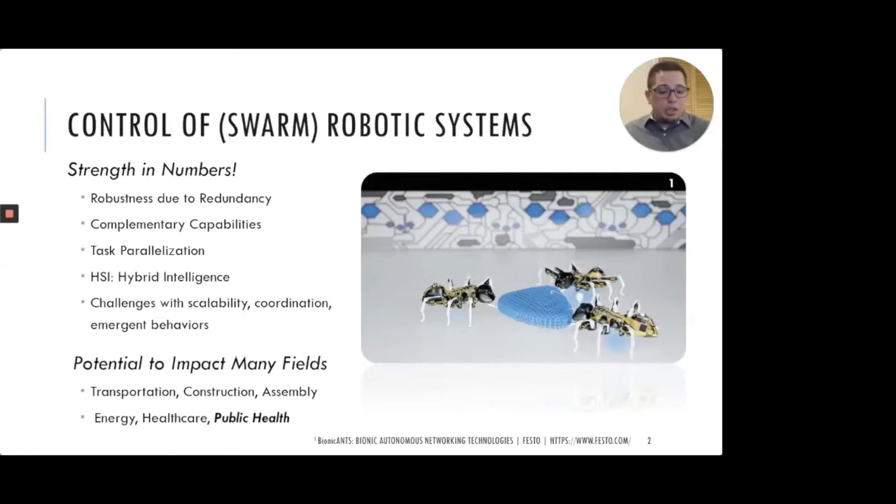In this particular work that I'm going to be presenting today, we're addressing the question of how do you manipulate a swarm of robots. We try not to control individual robots with this work. Instead, we set an objective for the collective of robots, and the individual robots then coordinate their motion with one another in order to achieve this collective objective.

In this work, we're going to take a slightly different approach where we think about the boundary itself as the thing that we get to control, kind of like taking the sand and rolling it up into a ball, and actually being able to take this ball and move it around.

This is going to allow us to control the overall position and scale of the swarm. We're going to be using coverage control in order to do this, as it provides a scalable mechanism to influence the swarm of robots with these abstractions for the density and concentration of the robots and the boundary, or the position and scale of it.

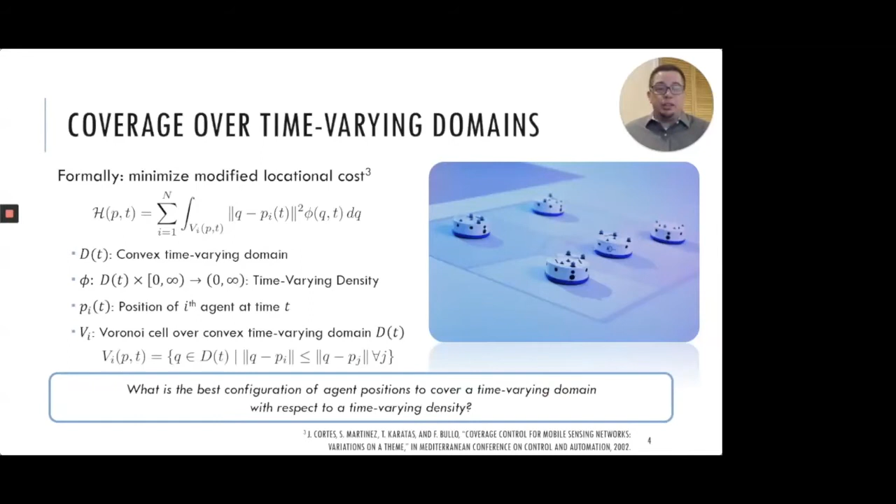Now, this locational cost is non-convex even in fairly straightforward situations where you have, for example, uniform density and a polygonal domain with few rules. And so when we try to minimize these configurations, we really think about achieving local minima or near optimal solutions.

It is a well-known result that for minimizing these configurations with respect to the position of the robots, a necessary condition for optimality is that the robots form this centroidal Voronoi tessellation configuration. So what does that mean? It means every single robot's position pi coincides with the center of mass for their respective Voronoi cells.

The center of mass is provided by the expression that we see here on the slides. It's the rational expression of two area integrals, whose domain of integration is actually the Voronoi cell, state-dependent and time-dependent because of the time-varying domain. And the integrand is time-dependent through the density function.

And so if we want the robots to occupy this center of mass position, that means that we're asking the robots to track this time-varying and state-dependent reference. And we want to control that it is able to achieve this.

Now, intuitively, from a controls theoretic standpoint, if we're just tracking our time-varying reference, then we need a few building blocks into our controller. First one is tracking feedback. This is pretty standard. Second one is tracking feed-forward. This is going to account for the time variations that we have from the domain and the density, and are going to allow us to then maintain this centroidal Voronoi tessellation once we achieve it.

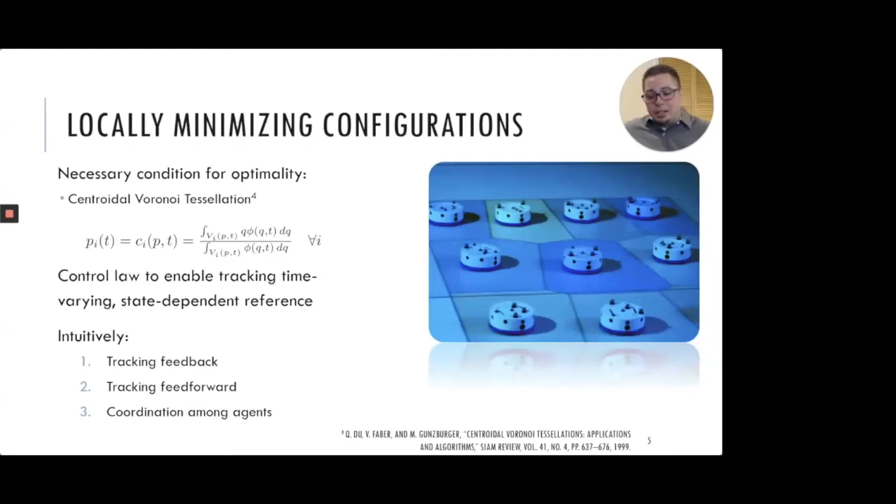Coordination among the agents is going to allow us to take into account the state dependency and the Voronoi tessellation that affects the domain of integration in order to, again, maintain this time-varying domain and density's centroidal Voronoi tessellation.

The coverage control law that we propose is given by the following expression. And it looks similar to expressions that we have proposed in the past, but there are nuances that are hidden here within the different partial derivatives that are unique to the problem that we're addressing here with the time variables.

But we can see that all the building blocks that we required in order to achieve and maintain these centroidal Voronoi tessellations are present. We have a standard tracking feedback term that actually looks a lot like the standard Lloyd's algorithm that's very well used in coverage control problems.

We have a feed-forward term, the partial of the centroids with respect to time, that accounts for the time evolution of these domains and the densities. And we have a matrix that accounts for state dependency here and provides coordination among the different agents.

In previous work, we've shown that this matrix can actually be swapped out with truncated versions of the Neumann series expansion in order to set the desired level of coordination among the agents and decentralize this controller.

For example, taking only the two terms in the Neumann series expansion would only require coordination between the nearest neighbors in the domain.

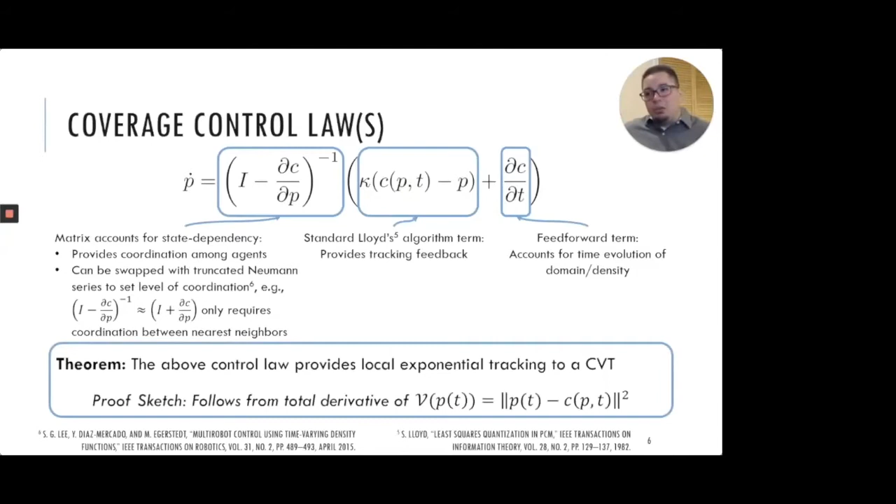And so in the paper, we show that the control law with the updated feed-forward terms and expressions are still able to provide local exponential tracking of the centroidal Voronoi tessellation.

To account for time-varying domains, we have the following proposition in the paper. It says that if we know the normal velocity of almost every point in the boundary of the time-varying domain, then the feed-forward term is given by the following expression.

Now, the expression itself is not so important. What is important here is that this first term accounts for the time variations from the density. The second term accounts for the time variations of the boundary of the domain.

And because the domain of integration for that integral on the second term calls for the intersection of the Voronoi cell with the boundary, what this says is that only the agents that are explicitly sharing a boundary in the Voronoi cells with the boundary of the domain are explicitly influenced by the domain itself being time-varying.

The agents on the interior are not explicitly affected by the time variations. They're implicitly affected through the coordination between the different agents. And this result follows from application of the Leibniz-Reynolds transport theorem and a lot of algebraic manipulation.

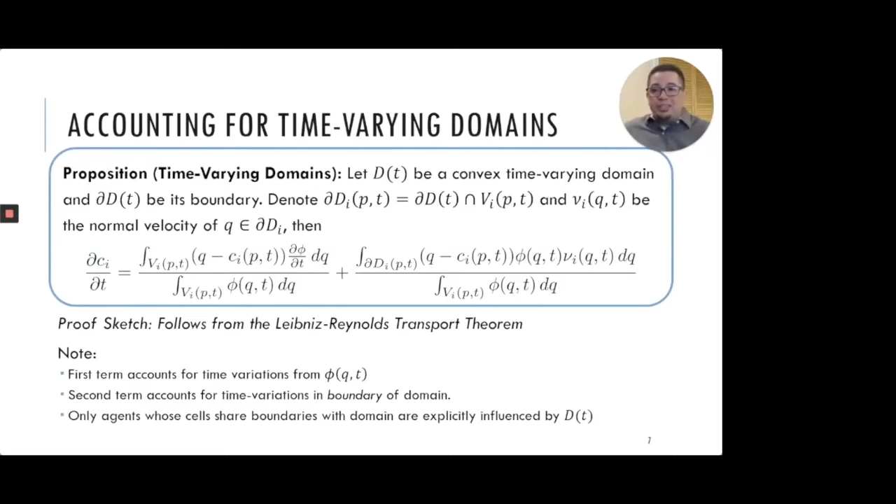So the scalability of this coverage control scheme was addressed in the paper as well. What we find is that under uniform density and 2D convex polygonal domains, the algorithmic complexity for our approach is actually constant in time.

Here we see a simulation with 100 robots where the square domain is actually traversing a circular path. What we see is that the agents end up forming this hexagonal configuration, and this is the heart of why this algorithm can actually be enacted in constant time.

In the paper, we show that we can find closed form analytical expressions in the case of uniform density for every single term in the control law. These closed form expressions are a function of the position of the neighboring agents in the swarm. In order to find these neighboring agents, we need to construct a partial Voronoi diagram.

There exist methods that allow us to compute these on average with a time complexity that depends on the number of neighbors.

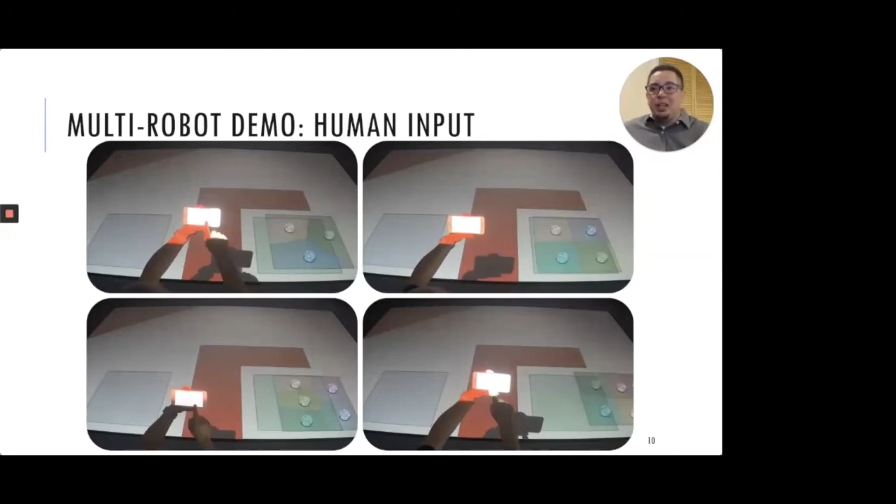This brings up an interesting feature: because the robots are always occupying the interior of the domain, it automatically provides a level of guaranteed safety for the robots, so they are not going to go into unsafe areas because the domain itself is not allowed to go there.

To conclude, we presented a scalable algorithm for manipulating a large team of robots via coverage control over time-varying domains, with exponential tracking results to locally optimal configurations. We've shown that under uniform density, there are closed form expressions, leading to a constant time implementation even for large teams of robots. The punchline is that a time-varying domain and time-varying density can serve as exogenous inputs to manipulate the swarm into executing motion plans or incorporating human inputs.

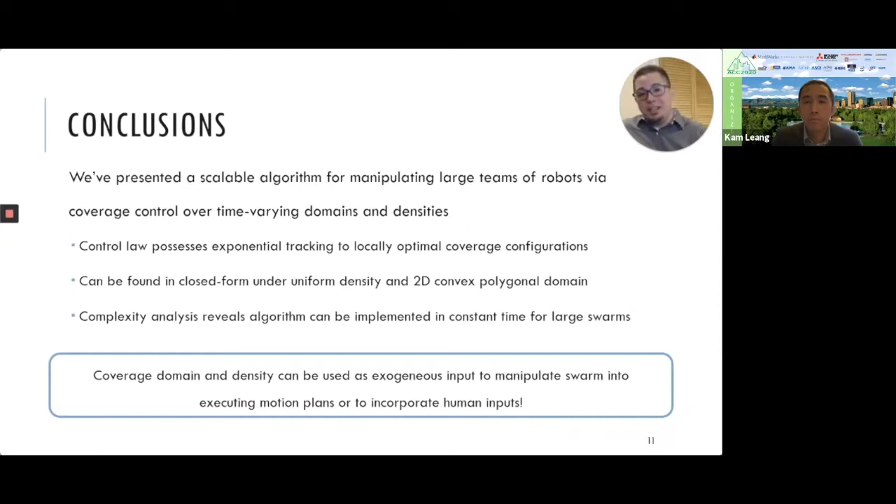So thank you so much for watching.

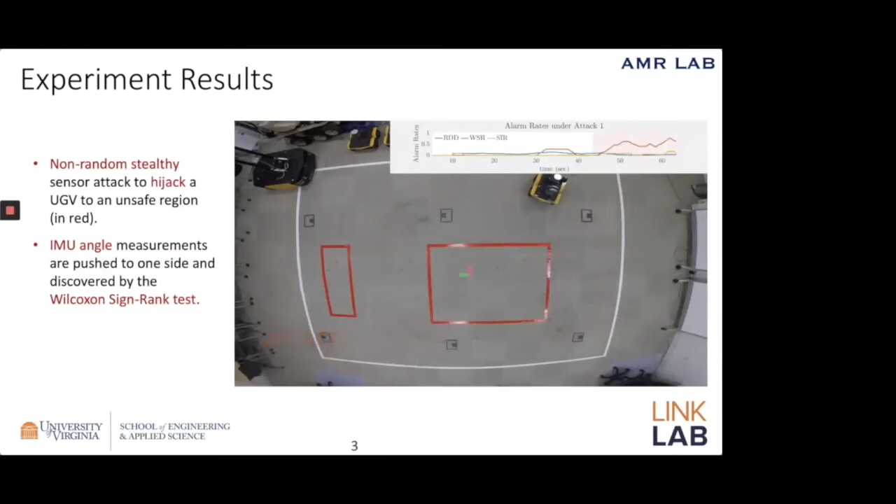However, as you can note on the top graph, the Wilcoxon test in this case is able to detect non-random residual behavior, resulting in an increased alarm rate. To hear more about this work, please visit our poster. Thanks.

Hello everyone, and welcome to my presentation. My name is Harshat Kumar, and in this video I will be talking about the navigation of quadratic potentials with star obstacles. Path planning involves 2 components: reaching a specified target goal from a start configuration and remaining in the free space, or avoiding obstacles along the way.

Because this is a fundamental problem in robotics and control, there exist many approaches to solve this problem, each with their own inherent advantages and disadvantages. Our approach is informed by the artificial potential approach. Artificial potentials combine an attractive potential to the target with repulsive potentials from the obstacles. The agent follows the gradient field generated by this artificial potential to reach the target.

This approach is popular as it can be implemented without global information and with smooth trajectories which are favored for bounded torque actuated robots. Unfortunately, artificial potentials are known to be incomplete, as the agent might converge to a local minimum of the potential rather than its goal.

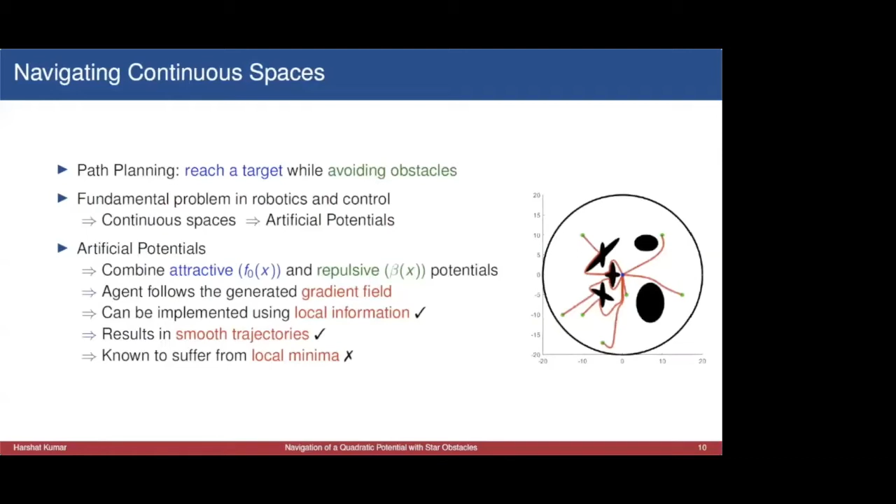Subject to certain geometric conditions, the Rimon-Koditschek potential can be proven to have exactly one local minimum at the agent's target. Spherical obstacles satisfy these conditions, but they lead to over-conservative obstacle estimates. When the obstacle is estimated by wider shapes, such as ellipsoids, a local minimum forms adjacent to the obstacle.

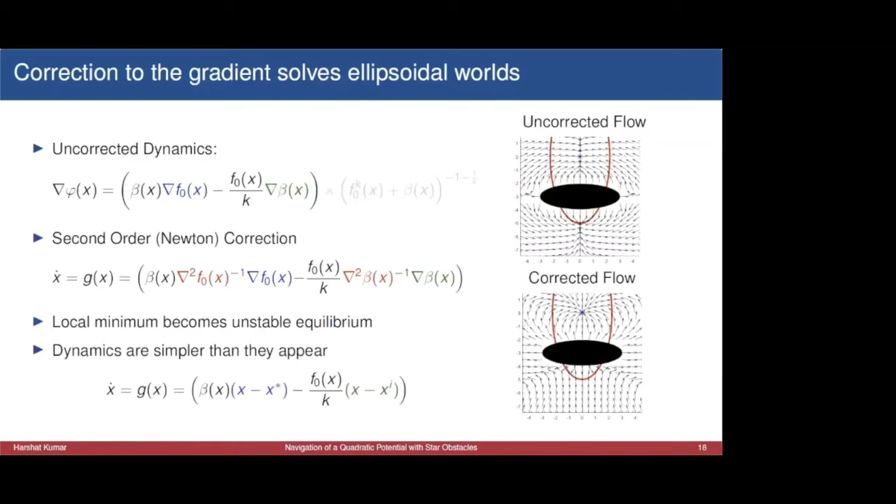In previous work, we showed that a correction to the dynamics enables the agent to circumvent wide ellipsoidal obstacles. Pre-multiplying by the inverse Hessian converts the wide ellipsoid into a sphere, and the local minimum is converted into an unstable equilibrium, as shown here on the bottom right. In fact, due to the quadratic form of ellipsoidal obstacles, the proposed dynamics are simpler than they appear. A closer inspection of these simple dynamics allows us to extend these convergence results beyond ellipsoidal obstacles.

Notice that x minus x star denotes the direction from the agent to the center of the quadratic potential. Similarly, x minus xi denotes the direction to the center of the obstacle.

As such, we propose the same simple dynamics can be applied to a more general class of obstacles called star obstacles. Star obstacles are defined by a center point such that the line segment between the center point and any other point is contained in the obstacle. In fact, all convex obstacles are star obstacles, with any point being a center point.

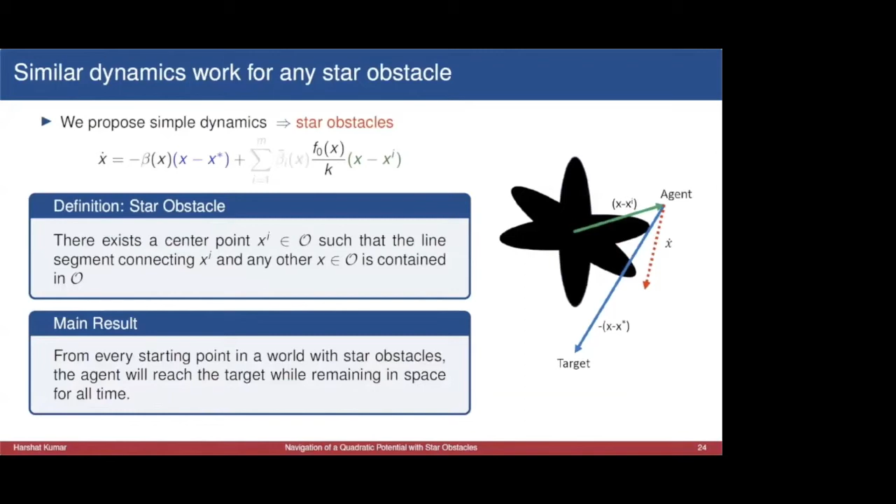In this work, we prove that from any starting configuration, the agent will reach the goal without colliding with the star obstacles. Thank you for attending my presentation, and I look forward to speaking to you in detail during the interactive session.

The title of the paper says I will quickly present a model-based cascaded control concept, so as well the control concept, in very brief form in this short presentation.

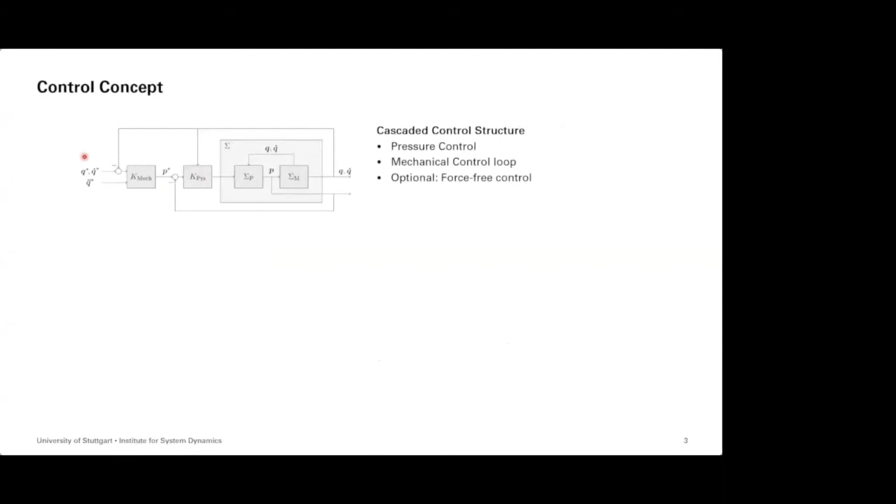Regarding the control concept, we used a cascaded control concept with an inner pressure control loop and an outer mechanical control loop. Optionally, a force-free control was also implemented, which you can find in the paper.

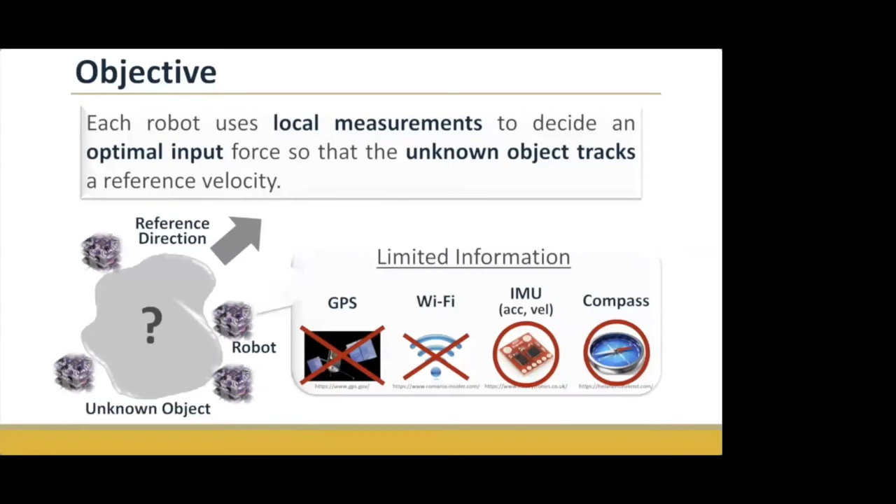We consider a payload manipulation problem where a rigid object is grasped at n+1 points by n robots and one external actor, for example, a human participant. They cooperatively transport the object. The input matrix of the robot, influence of external force, and centrifugal and Coriolis terms are unknown.

This paper presents a novel distributed optimization algorithm based on primal-dual gradient dynamics. In general, we need to know the B matrix to apply the primal-dual gradient dynamics for this type of optimization problem.

However, the cooperative payload manipulation system has a suitable relationship between global and local velocities. By virtue of this suitable property, we can obtain fully distributed optimization dynamics with an additional mild assumption of difference in angular velocity. Our manipulation scheme amounts to implementing a combination of low-pass filter and PID velocity controller.

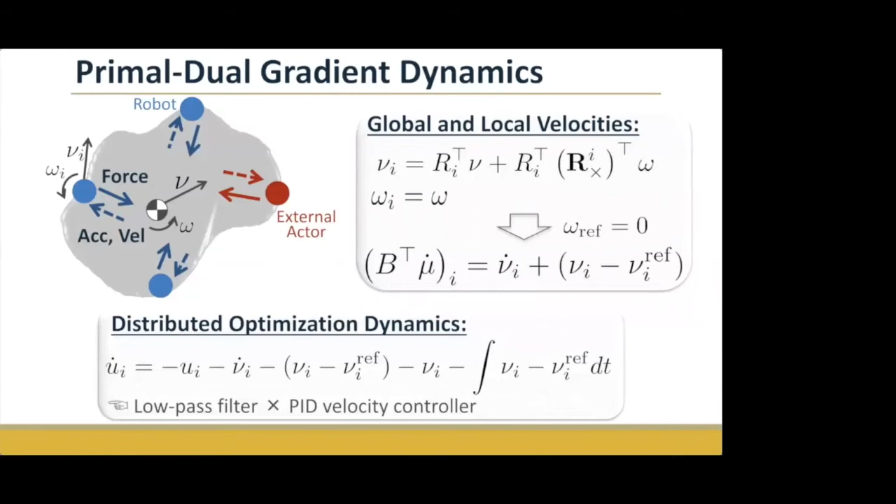As a main result, local exponential convergence of the presented dynamics can be proved. Finally, we demonstrated the effectiveness of our presented approach through numerical simulation. We can confirm that the object velocity converges to the reference, even after the decrease of the number of active robots.

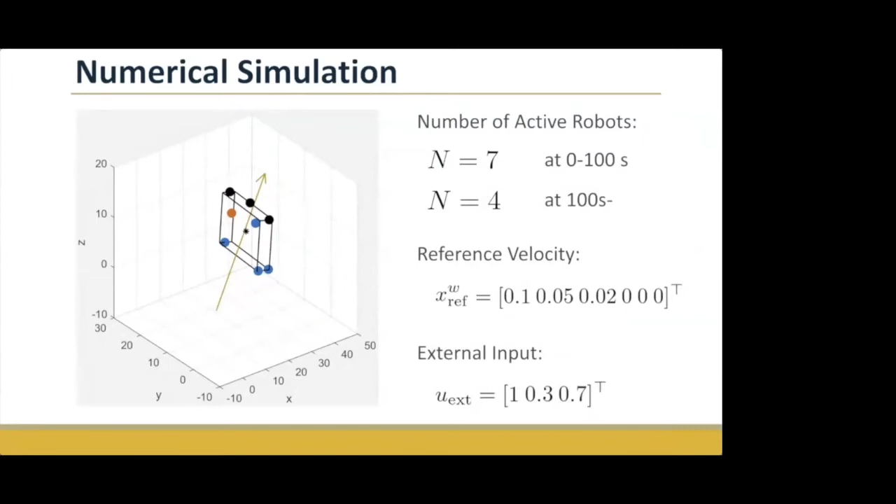A striking example of collective transport is what is done by ants, because they do not exchange information, they have no global position information, they have no knowledge about the payload and their teammates, they are not given predefined trajectories, they have knowledge only about the direction to the goal, and they rely only on their local information.

So we define a problem in the framework where we assume that we have differential robots with one manipulator arm. The robots have arbitrary configuration and distribution on the payload. They have no information about the payload's dynamics, geometry, position, and velocity. They have no knowledge about the distribution and configuration of other robots, no knowledge about the attachment vectors, and no explicit communication capabilities.

The objective is that we want the robots to transport the payload towards the goal with a desired constant velocity, and we want the robots to converge to a stable steady-state configuration during the transport.

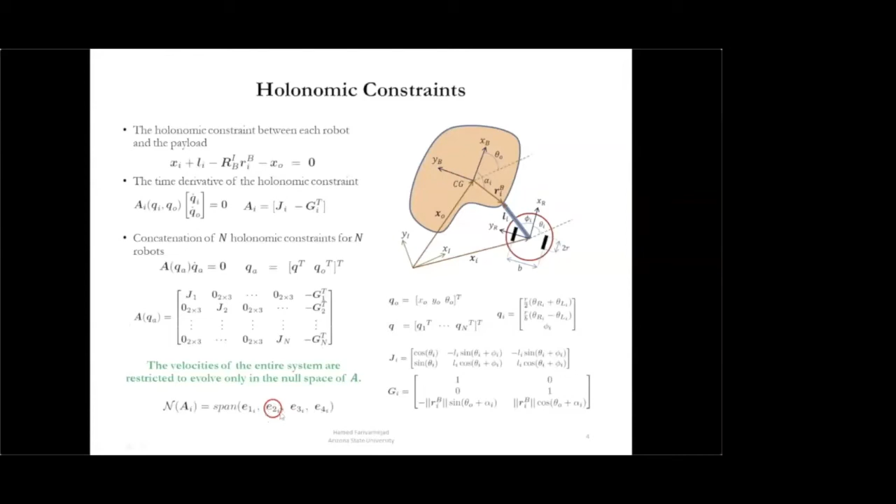If we integrate all these constraints for all the robots, we'll get this large equation with this large constraint matrix, the A matrix, and we know that the velocities of the entire system are restricted to evolve only in the null space of this A matrix, which is spanned by these four unit vectors, and among all these, E2 has a circle, because when we want to design the desired velocity for each robot, we use just E2.

to design this desired velocity. And when we design the desired manifold of motion with this equation, we can prove that with these desired manifolds, all the control objectives are entirely satisfied.

And with this linear parameterization of the robots, we can design this totally decentralized control law and adaptive law, and we can prove that the closed loop system is globally stable, and all the manifold parameter errors converge to 0 with this control law.

And we did a simulation in WEBOTS with 8 robots, and we can see that the payload here is transported to the goal with a desired, constant direction, without significant rotation.

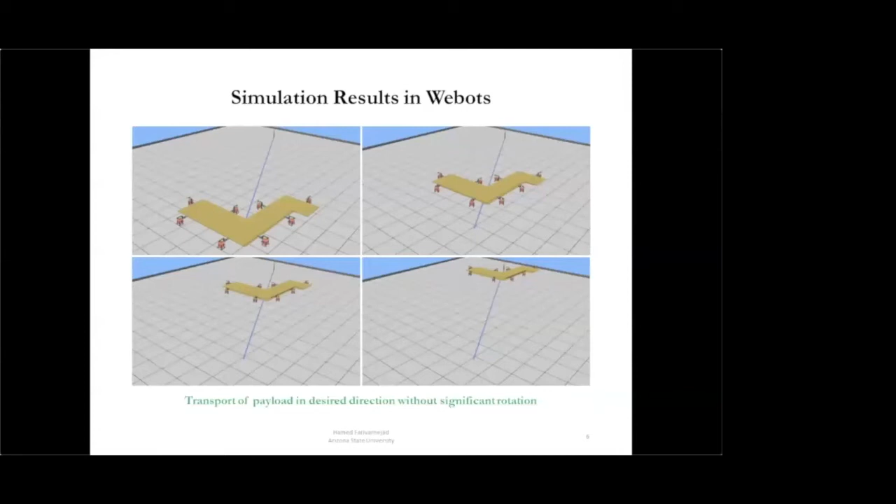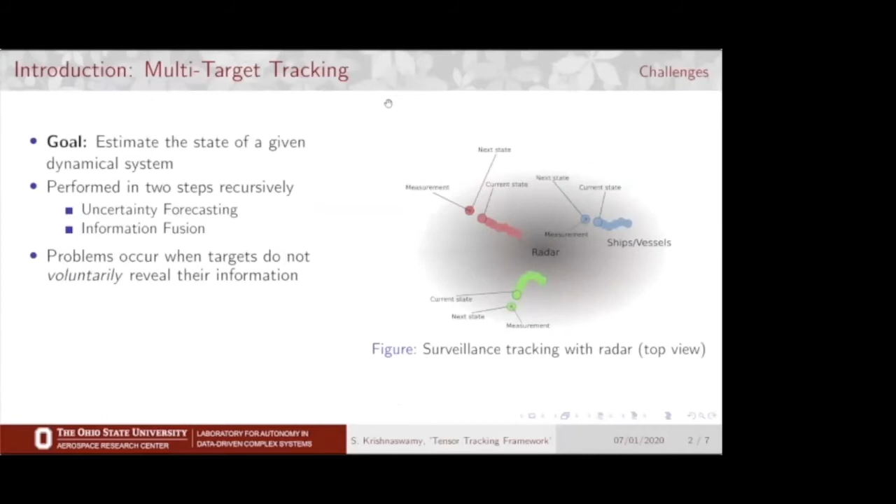Backing up a little bit, multi-target tracking aims to estimate the state of a given dynamical system. This is usually performed in 2 steps recursively: uncertainty forecasting and information fusion. The problem with the latter step is that targets often do not voluntarily reveal information regarding their state, and we need this information to determine which measurement to use for which target to perform a state update. This is complicated by the presence of clutter and compounded by the scale of the problem. This is generally known as the data association problem, and many solutions exist for it. I'm going to focus on one here.

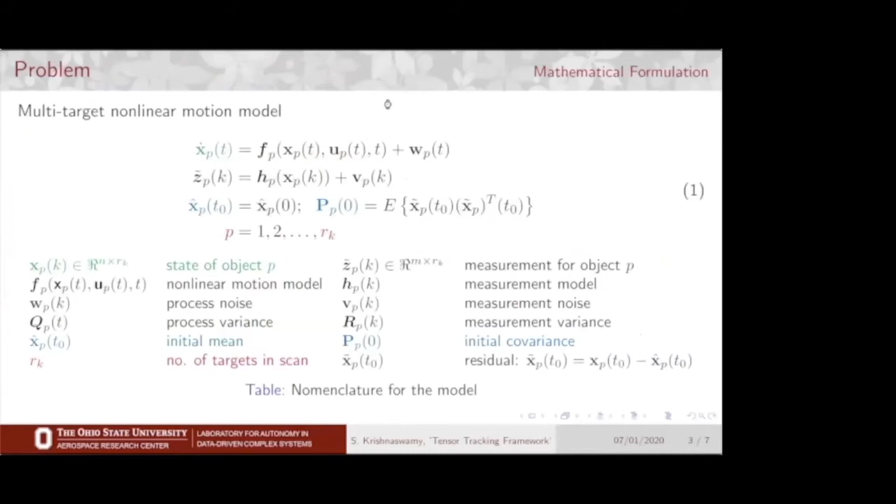To formalize this a little bit, this is the multi-target nonlinear motion model we're using in this paper. I want to draw your attention to 3 things: first, the number of targets, which is more than 1; the state of the object given by a nonlinear process model; and finally, Z tilde of P, which is the measurement needed to compute the state. But what we get in a practical scenario is Zj of K, and we need to reconcile these two somehow, and data association is how we do it.

The way data association is performed in this particular paper is by using DJPDA, which is a tensor framework developed and published earlier. I'm not going to go deep into this, but I just wanted to mention it.

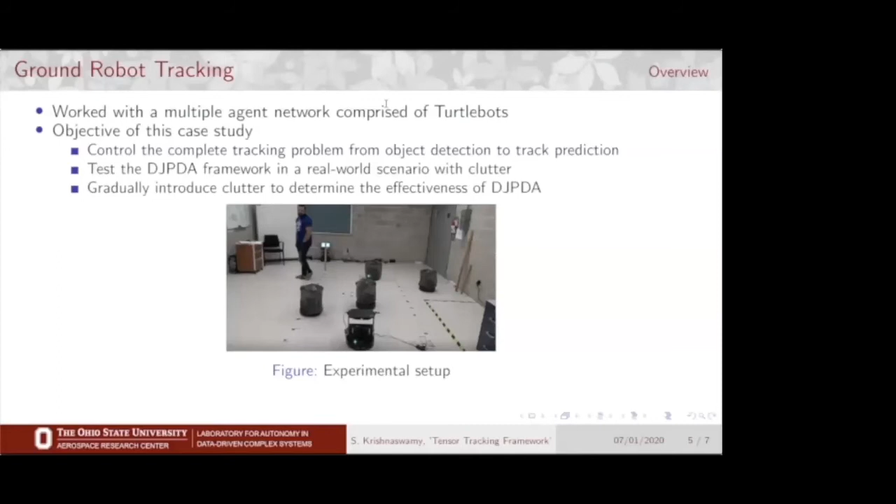The experimental design here uses a fleet of turtlebots. The objective of this case study was to control the complete tracking problem and test that DJPDA framework, already published, to see how it fares in a real-world scenario with clutter and higher data frequency. The experiments were conducted gradually, starting with 1 agent. Complexity was added by adding additional agents with the same process model, adding an undesired object with a different process model, clutter with an unknown trajectory, and random interference using humans.

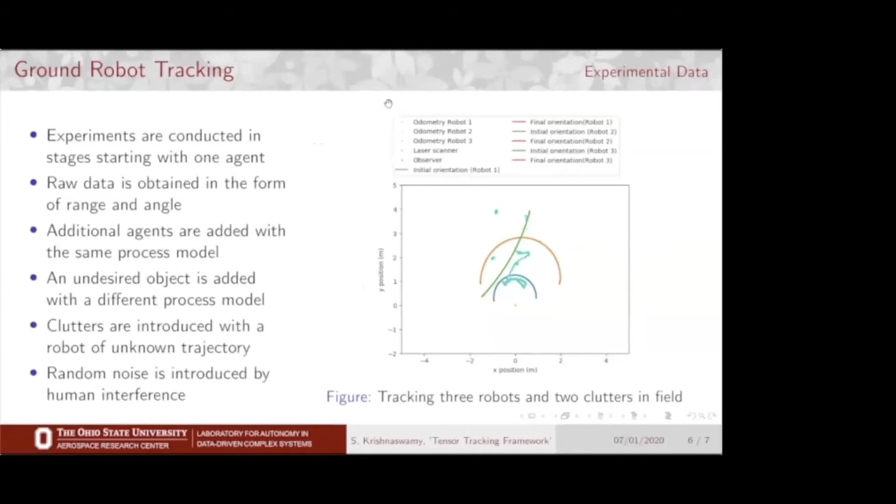We also did some simple data cleaning for this. We eliminated the wall noise because we knew the wall was at a known position. We also took into account the point clouds and performed a k-means clustering algorithm to determine what position each point cloud represents, which would be a turtlebot position.

I want to draw your attention to a couple of results here. First, this is the trajectory as computed after the turtlebot measurements were received, using the data association algorithm. The two main results here are ranks versus the log time, and the uncertainty.

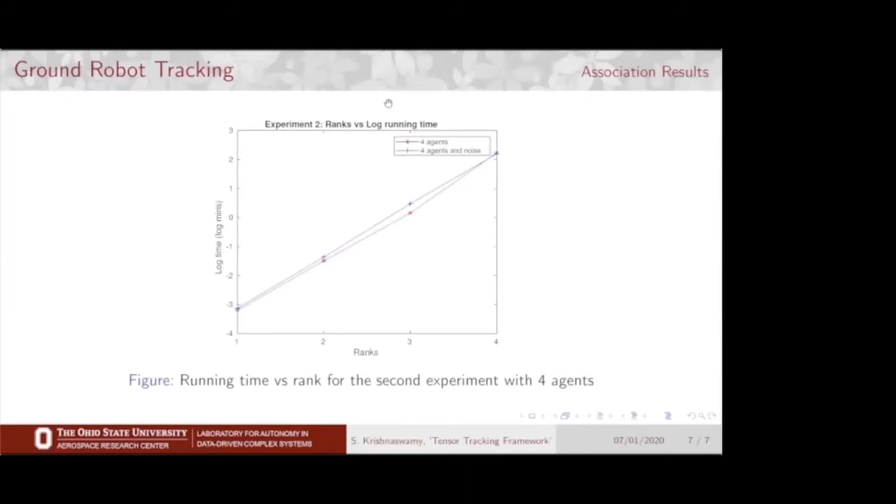Ranks are the tuning parameter that the tensor framework introduces. The higher the rank, the higher the complexity of the underlying algorithm. JPDA is known to be exponential. The key thing here is that ranks curb that exponentiality by introducing a tuning parameter. Once a rank is set, that time is also set, and the uncertainty reduces with the number of ranks. Together this gives us an additional tuning parameter.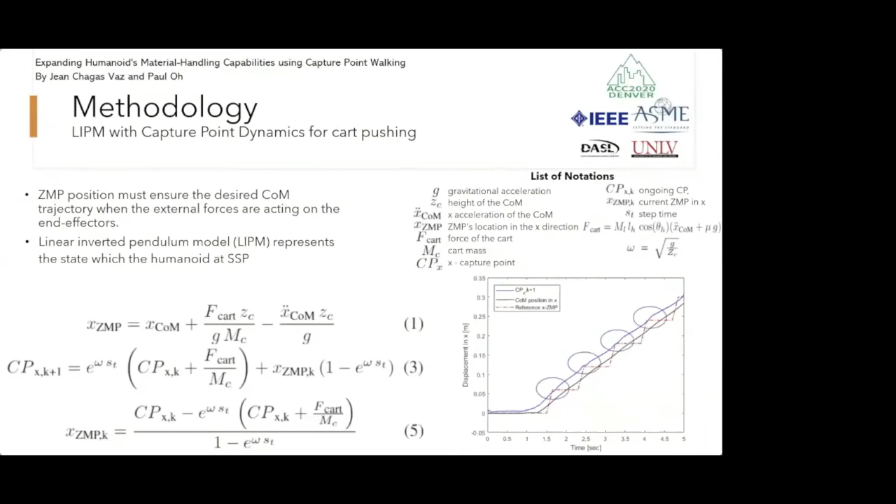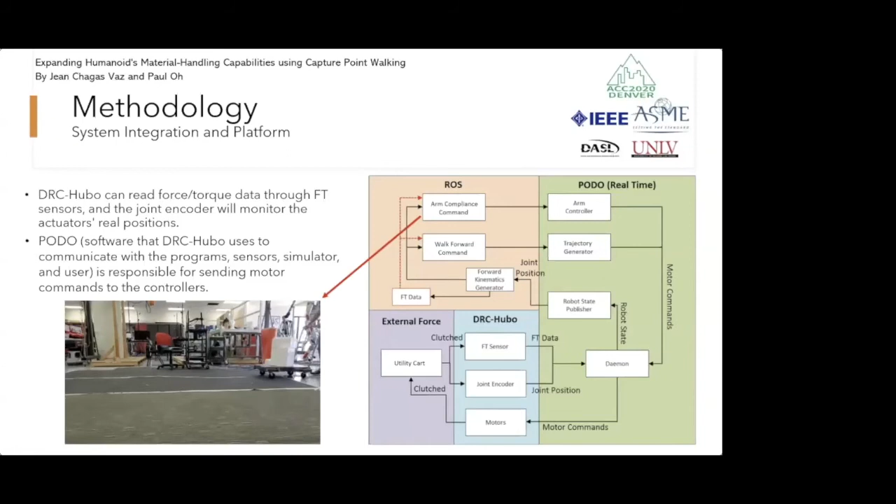Here I have a bit of the system integration. DRC was equipped with force torque sensors on the ankles and wrists, and PODO is the overall software that communicates between those sensors. By observing humans pushing carts, we've noticed that arm compliance is quite a must if you want the robot to push the cart and walk at the same time. For that reason, we have applied an arm compliance based on friction.

To solve that problem, we had to ensure the desired wrist position to the high dimension nonlinear robot's arm, and we just used a traditional feedback linearization based technique.

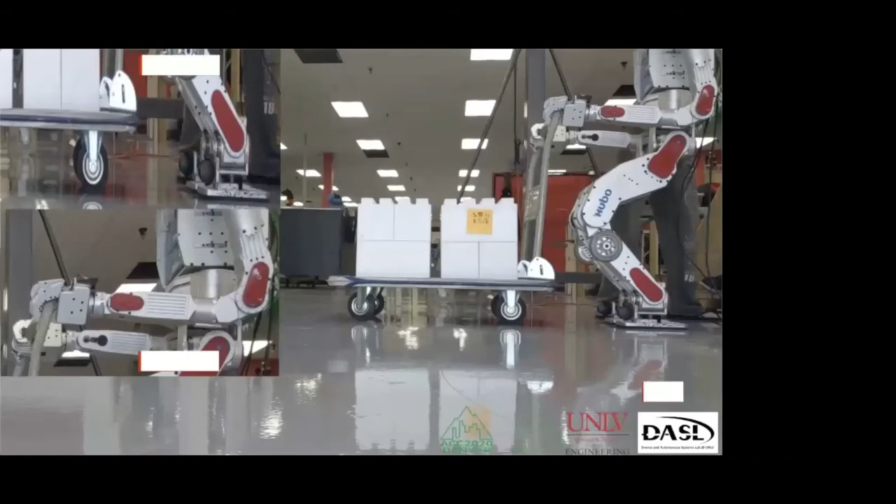The robot is capable of keeping stable walking even though the cart is constantly shifting its center of mass. You can also observe the arms are indeed using friction compliance to push this cart. This is one of the carts that we used.

The takeaway from all of this is that cart pushing and material handling remain an open problem. The robot-object interaction easily destabilizes walking, so this problem has to be solved before humanoids are deployed in distribution centers and disaster cleanups. We have successfully demonstrated capture point walking with arm friction compliance, so the next logical step is whole body coordination, and that is coming up soon.

Hello, I am Ryan Krauss, and I am really interested in low-cost, real-time feedback control experiments. That has led me to publish some previous work on using Arduinos for real-time feedback control. But I also really love Python and would love to use it in real time to do my control law calculations. I think it gives me a lot of power and flexibility.

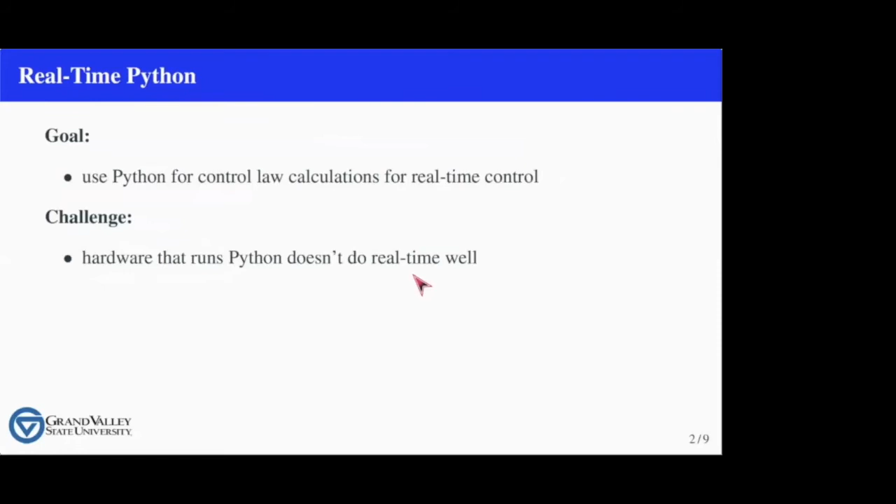The primary challenge I run into is that hardware that runs Python does not generally do real-time stuff very well. So in my previous work, this has looked like an Arduino connected to a laptop, and the laptop is doing the control law calculations and sending information to and from an Arduino over USB. The Arduino controls the timing, interacts with the plant, reads the sensors, and sends the actuator commands using digital to analog conversion.

In this work, we're switching from a laptop to a Raspberry Pi, and we're switching from serial to I2C as a way to reduce latency.

In previous work, Python essentially sits waiting for a response from Arduino. As soon as it gets the sensor values, it does its control law calculations and sends out a new set of commands. The Arduino waits for a timer interrupt, sends those commands to the plant, and then sends data back to Python. The primary bottleneck is how long it takes from the time the Arduino sends sensor information until the time it receives the next batch of actuator commands.

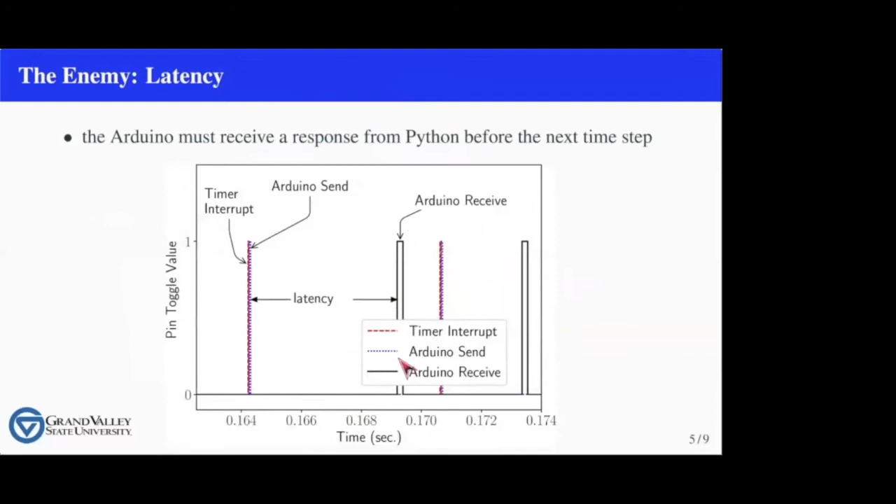That latency can average 3-ish milliseconds and be as high as 5 or even slightly over. So that bottleneck limits this approach to roughly a 200 hertz digital control frequency. Reducing that latency was the primary goal of this work.

It basically came down to serial having latency I don't seem to be able to get rid of. So switching over to I2C and using 2 different Arduinos allowed Python to ask the timing Arduino when the next timer interrupt event occurs. In this communication cycle, we're essentially doing the same things, but doing it over I2C has much less latency than the serial-based approach.

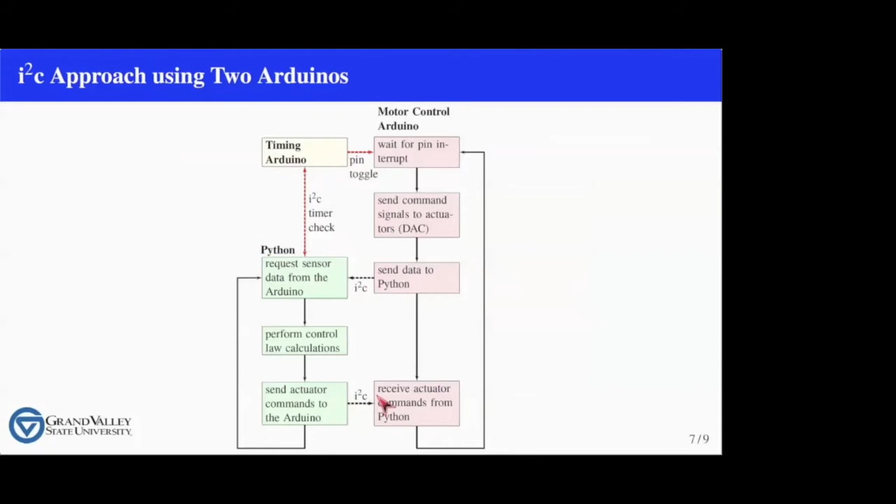Using pin toggles from the Arduino combined with an oscilloscope, we measured the latency of this approach the same way we had done with the USB serial approach, and we find that we've reduced that latency by roughly a factor of 3, which should make it possible to do real-time feedback control experiments using Arduino plus Raspberry Pi at roughly 500 to 800 hertz.

Hello, my name is Sean Brennan, and I'm pleased to present this paper, Energy-Aware Path Planning for Skid-Steer Robots Operating on Hilly Terrain. The lead author of the paper is the recently graduated master's student, Veronica Gruning, and my co-authors are Jesse Pentzer and Karl Reichard.

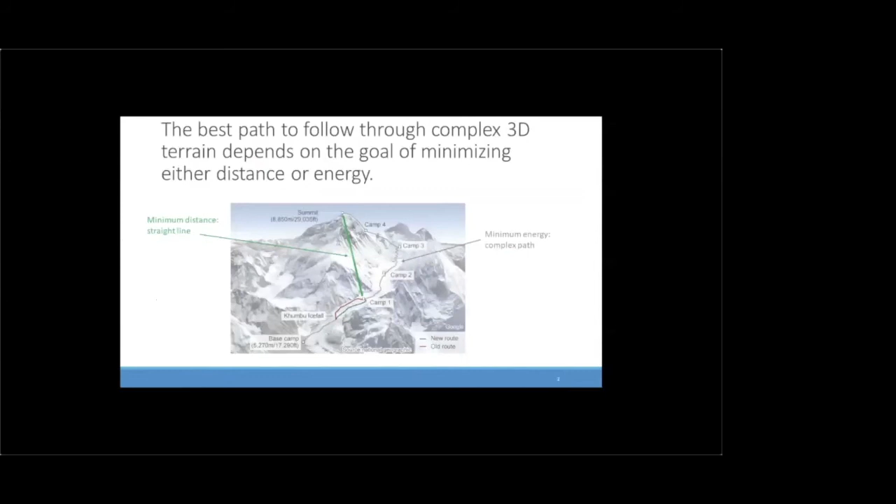The problem we are seeking to solve in this work is represented by the human challenge of climbing a mountain. The minimum distance path is a straight line toward the peak, whereas the minimum energy path is often complex, longer in distance, and generally seeks to minimize changes in elevation.

While minimizing distance from a start to end point is a relatively trivial task of connecting straight line segments, the calculation of minimal energy paths is made difficult for off-road skid steer vehicles due to the calculation of slope energy and spin-in-place energy in the presence of deformable or slipping soil surfaces.

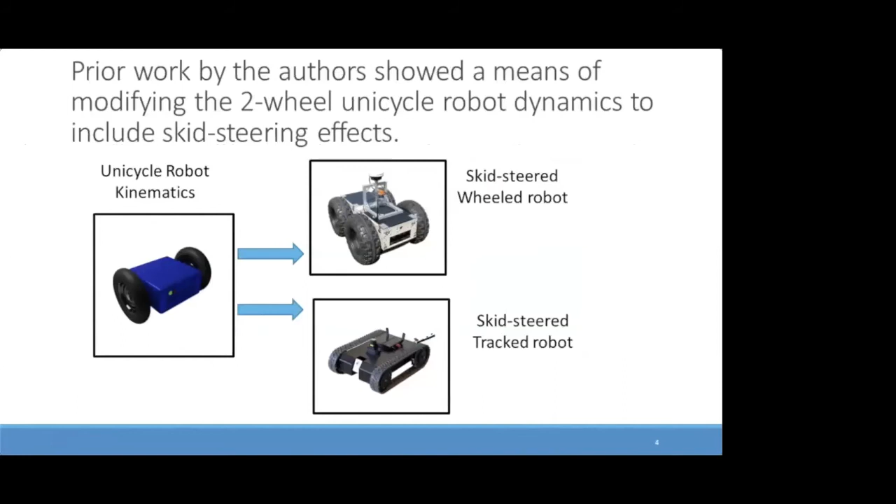Prior work by the authors shows the means of modifying the 2-wheel unicycle robot dynamics to include skid steering effects. These dynamics are based on the instantaneous centers of rotation rather than the center of the tire or treads. This modification allows straightforward modeling as well as online estimation of energy utilization of skid steering and grade climbing.

on deformable soils. The problem of finding the minimum energy trajectory in hilly terrain is a non-convex problem, particularly with changing soil frictions. To obtain solutions, this work uses the sampling-based model predictive optimization, or SBMPO algorithm, with models of terrain topology and soil parameters to develop energy-aware path plans.

Two situations were analyzed that prioritize either distance or energy for path planning on a simple simulated hill topology with varying realistic friction parameters. These represent soft or hard soils. The parameters for these situations are given in the table.

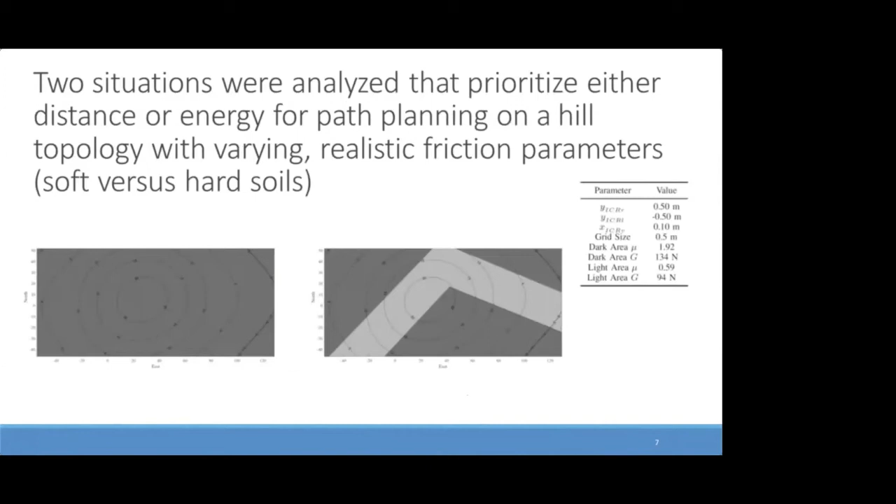In the homogeneous soil case, we observed a 10% decrease in energy, but with a 17% increase in the distance versus straight line driving. In the changing soil case, we observed a 5% decrease in energy, but with an 11% increase in distance versus straight line driving.

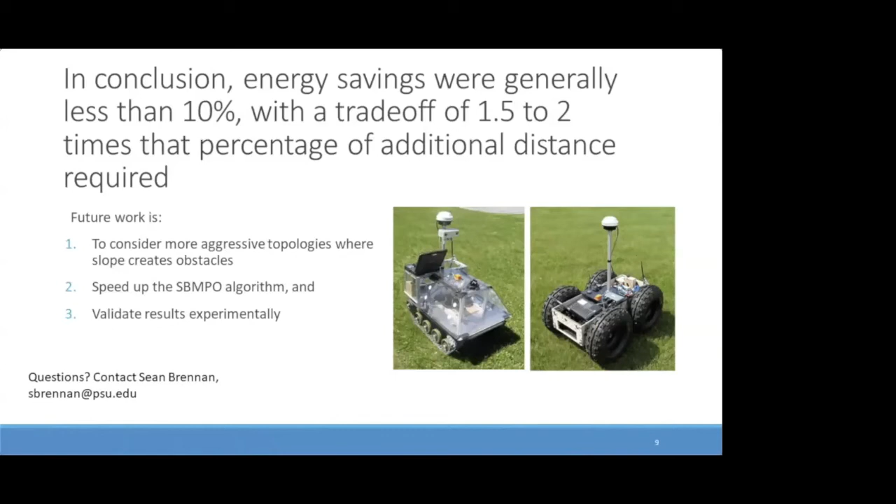Future work includes more aggressive topologies, speeding up the algorithm, which is currently not real-time, and experimental testing of the algorithm with real robots. If you have questions, I'd be glad to discuss in the breakout session, or you can email me, Sean Brennan, at this address.

Hello everyone, my name is Yuan Gao. I'm a PhD student from the Trace Lab at the University of Massachusetts Lowell. In this presentation, I will talk about our research on impact-aware online motion planning for fully actuated bipedal robotic walking.

This work is done with Dr. Xinyan Yan from NVIDIA and my advisor, Dr. Yan Gu. Real-world operations in complex, dynamic environments demand online planning.

However, the computational burden of the associated walking motion generation is heavy because, first, walking is naturally a hybrid dynamic process involving nonlinear state-triggered impact dynamics, and second, a walking robot typically has many joints causing a high dimensionality of the robot's state space. Therefore, realizing online impact-aware planning for walking robots remains a challenging problem.

The objective of this work is to develop an impact-aware planning method that generates a desired full-body motion profile in real time for fully actuated walking robots.

Our proposed planning method reduces the computational burden of planning by constructing a keyframe posture library offline. Also, it guarantees that the planned motion respects the robot's landing impact dynamics by explicitly considering the impact behavior.

The flowchart illustrates the proposed planning method, which consists of 4 steps. The first step is to construct a keyframe posture library. A keyframe posture is a pre-computed kinematically feasible configuration of a walking robot when its foot lands on the ground.

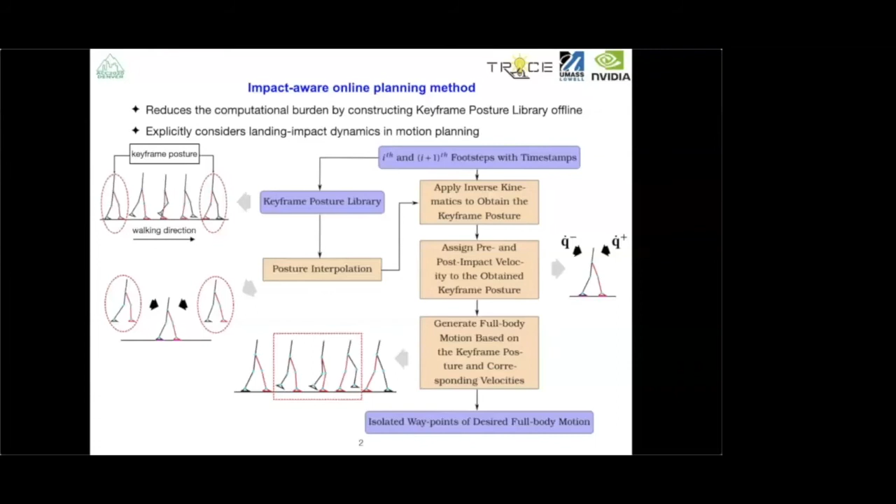In the last step, the planner generates a full-body motion based on the keyframe posture and its corresponding velocities. We have validated our impact-aware online planning method through MATLAB and Webots simulation of the Darwin OP3 robot.

The robot has 20 joints. Our planner is able to generate impact-aware motion of 1 walking step within 0.6 seconds. In these simulations, the nominal step duration is about 0.8 seconds.

Both simulation results demonstrate the effectiveness of our proposed planner in generating impact-aware motion in real time. Thank you. I'd be happy to take any questions during the poster session.

My name is Antonio Loria. I am with the CNRS France, and I will speak about the decentralized partial consensus controller for nonholonomic vehicles over networks with interconnecting delays. This is a joint work with Mohamed Maghenem from University of California, Emmanuel Nuño from University of Guadalajara, Mexico, and Elena Panteley from CNRS France.

Partial consensus control pertains to the case in which we have a group of robots that are initially far apart, and we want them to converge to a rendezvous point that is not specified a priori.

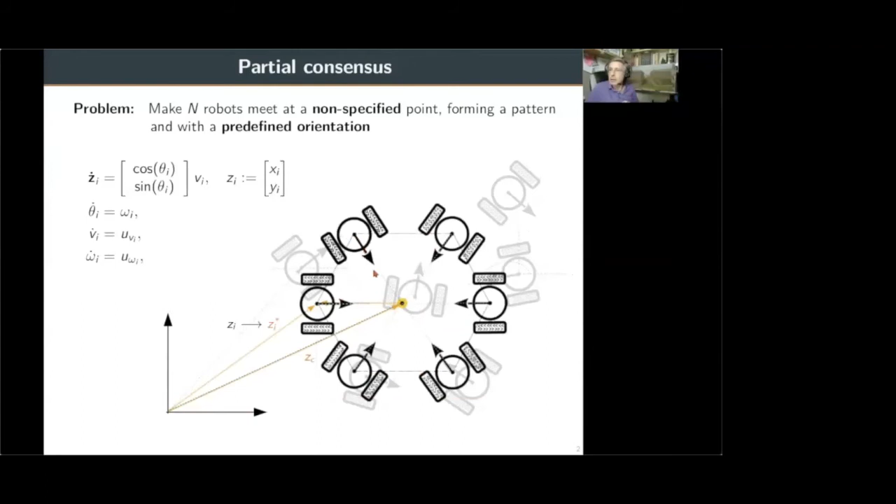In doing so, the robots also have to acquire a formation, a geometric pattern, and a desired predefined orientation. Only orientation is predefined. We address this problem under the realistic scenario in which the robots are initially far apart, so proximity sensors are inefficient.

Instead, the robots use GPS measurements, and they transmit these measurements over a wireless network. This network is supposed to have at least one spanning tree so that every robot receives the information from at least a sufficient set of neighbors. Also, because the network is wireless, it induces continuous time-varying bounded delays.

The controller to solve this problem is given by these two equations, one for the translation motion and another for the orientational motion. As you can see, the controller contains proportional errors to the consensus errors we see here. These are the states of the ith agent, the actual agent, and these are the states of the neighbor that are received with time-varying delays.

Another term that is crucial in the controller is this one here, which is the product of one function that depends only on time, an external function, and this function is supposed to be persistently exciting. It can be a periodic function, or just some random noise, or any other function that is persistently exciting. The second term is basically some kind of norm, except it's in vector form of the error.

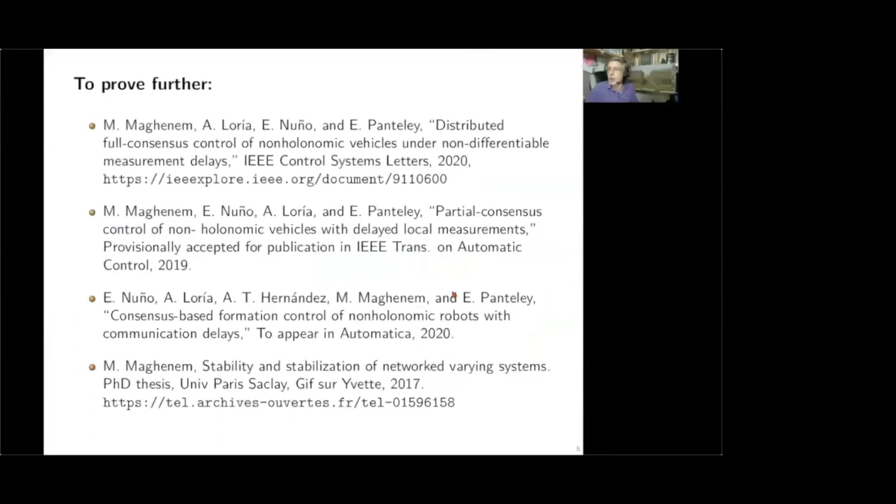Hello, I'm Evan Krell, presenting Game Theoretic Potential Field for Autonomous Water Surface Vehicle Navigation using weather forecasts.

Instead of shortest distance, marine path planning is often based on energy efficiency, such as the impact of water currents along the path. These velocities may be obtained from water current forecasts, but are only uncertain predictions. We are using a game theory approach to handling this uncertainty.

The boat and weather are said to be opponents in a game where the boat wants to minimize energy expenditure and the weather wants to maximize it. Of course, the weather has no opinion, but the model promotes worst-case planning.

The major contribution is robust planning with online weather forecasts. Dynamic programming is used to generate a policy across the entire planning region, and game theory is used to determine the actions of the players at each decision.

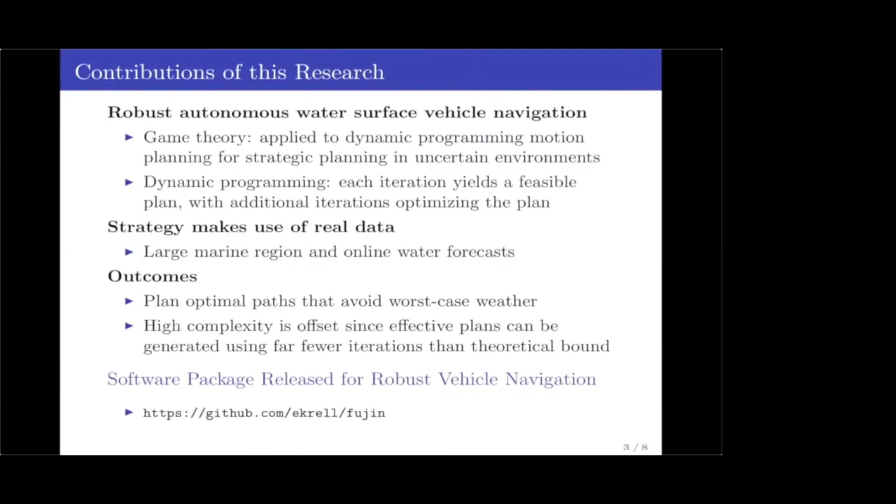Dynamic programming theoretically requires a vast number of iterations, but we are interested in the convergence rate and how many iterations are actually needed for a useful real-world policy. Here's a quick look at the dynamic programming. We start from the goal and solve it bottom up so that even the first iteration has a feasible solution.

15% work is saved if the worst case were to occur. However, these models tend to have sparsely published error reports, so the error margin is synthetic here. Raising it, game theory becomes arbitrarily better.

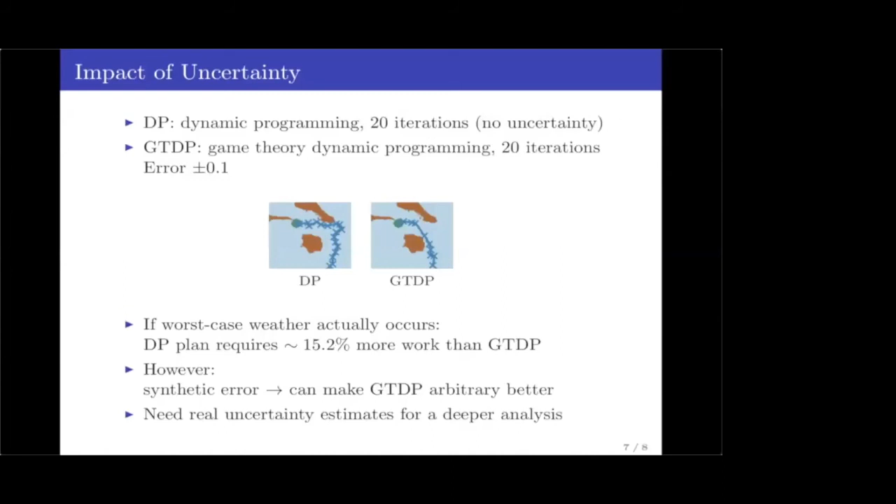So we want to learn an estimate of the uncertainty with the boat, who then becomes a local domain expert over its lifetime of missions. Game theory allows planning for worst-case weather, and the convergence suggests useful plans from few iterations.

However, we are also interested in applying approximate dynamic programming and focused Markov decision process techniques for getting plans without searching the entire space. Thank you very much.

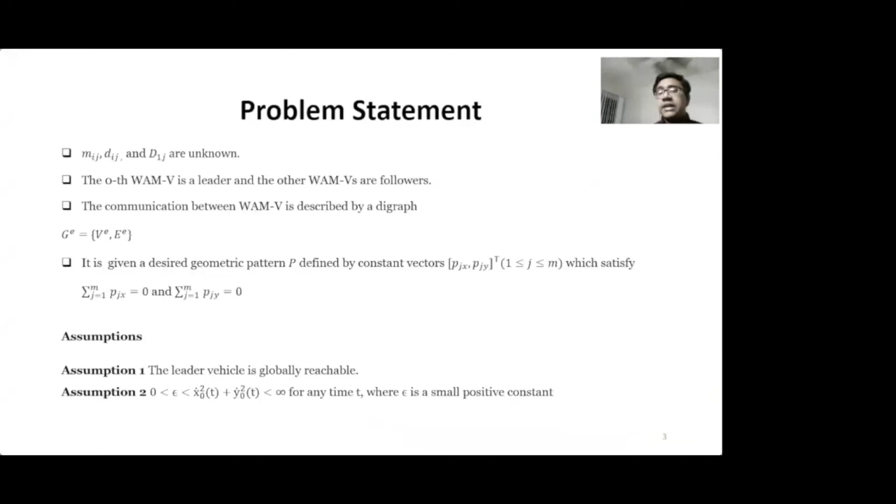These are unknown. The 0-th WAM-V is a leader, whereas the other WAM-Vs are the followers. The communication between the WAM-Vs is described by a digraph G. It is considered a desired geometric pattern, defined by constant vectors.

So the formation control problem is to design distributed control laws so that equation 7 to 9, which is described, is satisfied.

So we propose distributed controllers through the backstepping technique by equation 10 to 12. In these equations, we can see there are some derivative terms present, M3 and M5. So these derivative terms make the implementation of the controllers complicated.

So in order to remove the derivative terms, we propose distributed command filter controllers through equation 14 to 19, and through compensated signals 20 to 22. Through these equations, we propose two distributed command filter controllers FR and FL, which make the computation really easy and also remove the derivative terms from the signals.

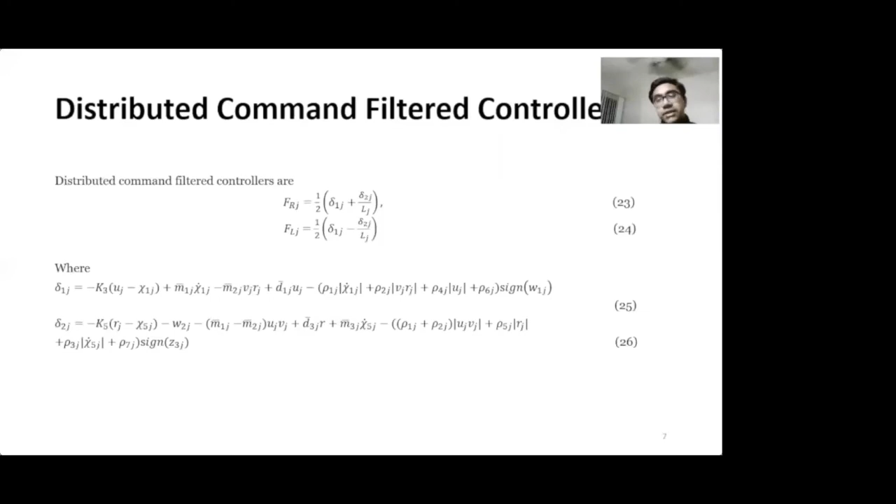The simulation results are performed in order to verify our proposed control laws. The simulation results in figure 3 and 4 show that the vehicles follow and converge to our desired formation.

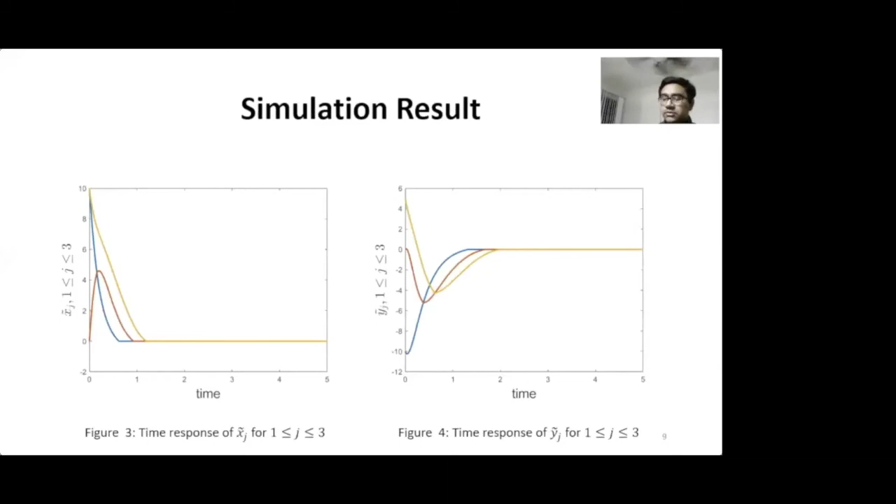So the conclusion: in this paper we considered formation control of multiple uncertain WAM-Vs and a related leader WAM-V. If inertia parameters are not exactly known, distributed robust tracking laws were proposed. To reduce the computational load in controller design, distributed command filter controllers are proposed.

Simulation results show the effectiveness of the proposed results. Thanks a lot for hearing me out.

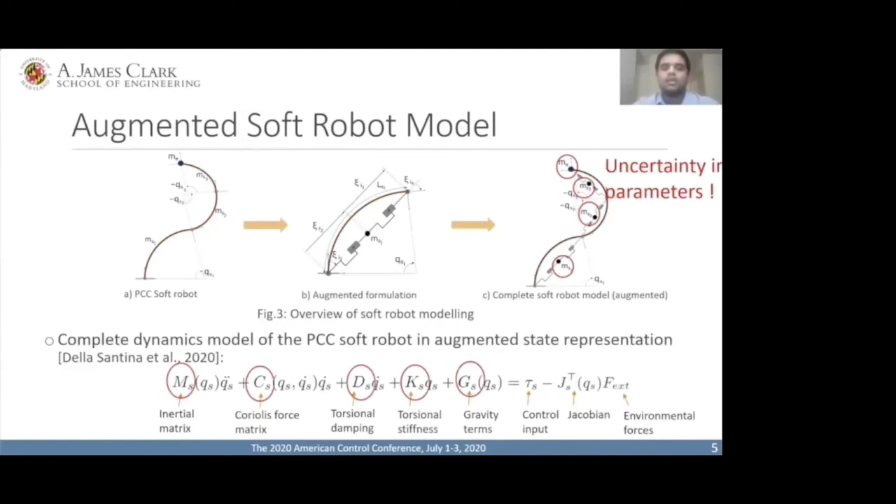However, there could be uncertainties in the parameters due to various reasons. Thus, the proposed control framework will be designed to mitigate such uncertainties. Therefore, we choose an adaptive control framework.

The control objective is to track the robot tip positions. To this end, the control inputs are computed for both the robots. Also, null space velocity of the soft robot is utilized to achieve subtasks.

The experimental setup consisted of a pneumatically actuated pleated-type soft robot with 3 segments, a motion capture system, and a laptop to run the control algorithms.

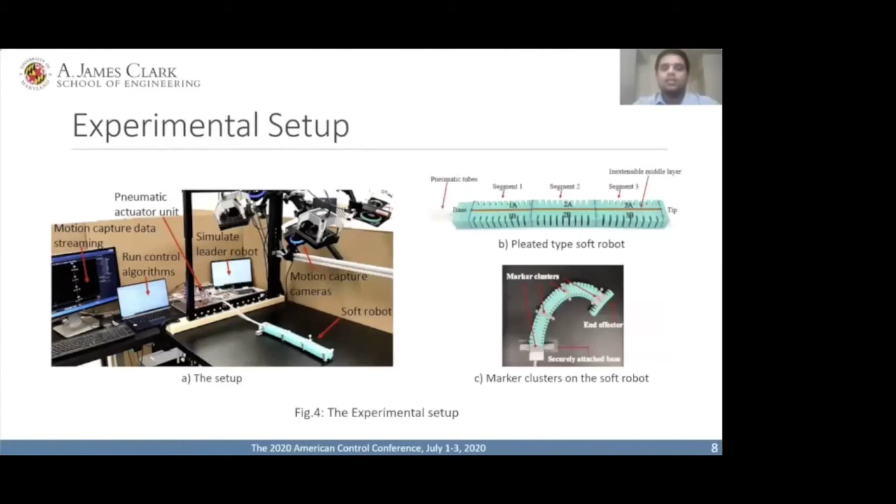Due to the unavailability of a suitable rigid master manipulator, it was simulated.

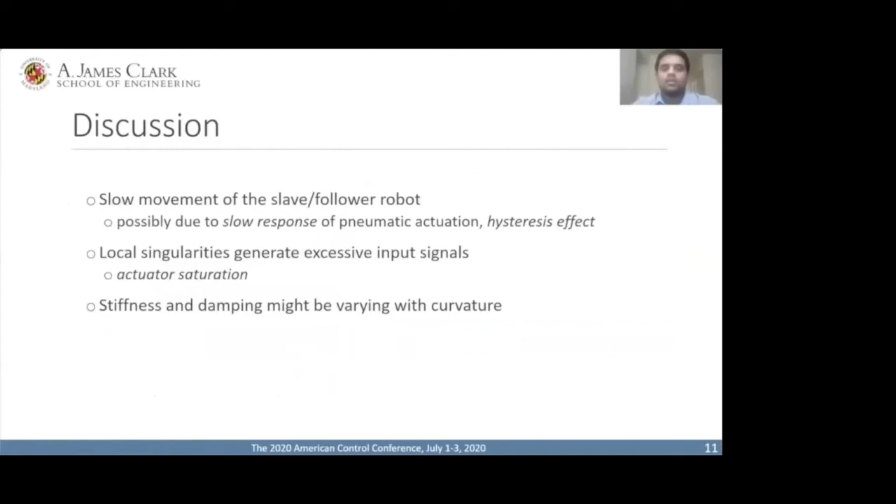This might have been due to the nature of the pneumatic actuation or due to hysteresis. Excess input signals were observed due to local singularities. Also, although the stiffness and damping of the soft robot were considered constant, they might have been varying.

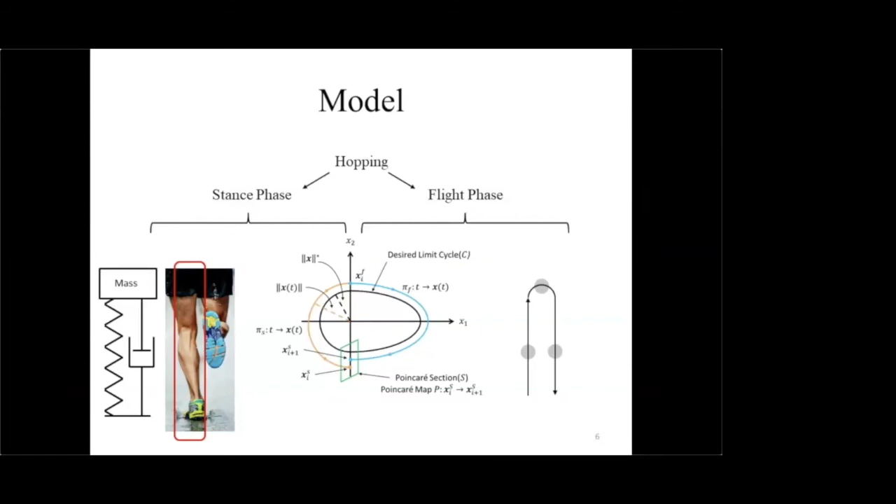Here we consider only the vertical motion because we only focus on the energy stored in the leg in terms of elastic energy. We divide the hopping system into stance phase and flight phase. In stance phase, we use a spring mass damper system to represent the legged system, while in flight phase we use a free-falling mass to represent the system.

When we compute the time derivative of the two norm of the state vector, we can observe the decrease in magnitude in time without control, and the state vector will eventually be attracted to the origin.

We try to use a controller that can regulate the two norm of the state vector such that the state vector will converge to the desired circle and hence the desired hopping height.

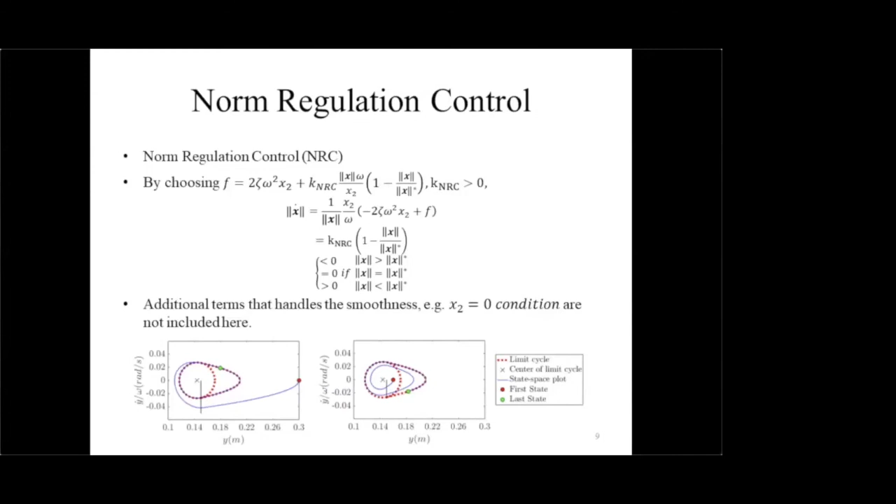The two figures show the simulations of inward and outward convergence to the limit cycle. The first simulation shows the mass converges to the desired height from a high altitude. This state space plot shows that the state vector converges to the desired limit cycle, shown in red dotted line, once it enters the stance phase.

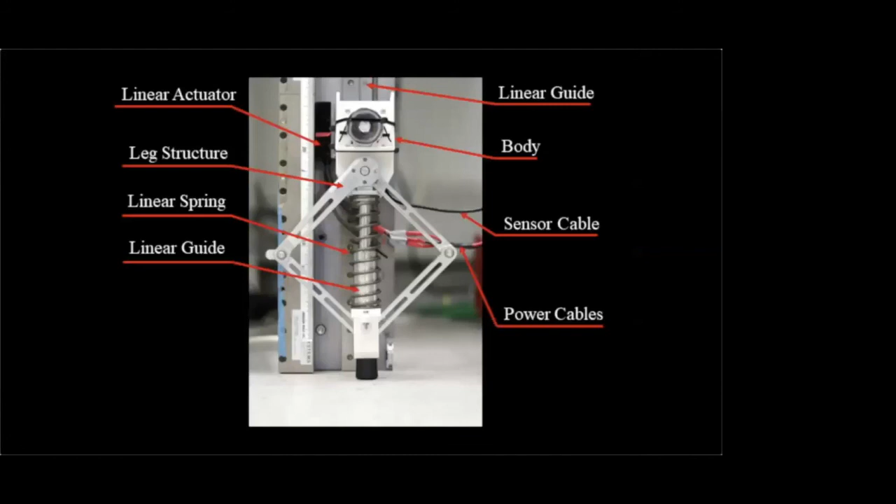The second simulation shows the mass converges to the desired height from a low altitude. Below, I'm going to show some experimental results of the implementation of this controller.

Firstly, we tried it on a hard contact surface. We can see the system converges to different heights quickly.

Secondly, we tried it on a soft foam block. With model uncertainty, the system was still able to converge to the desired height.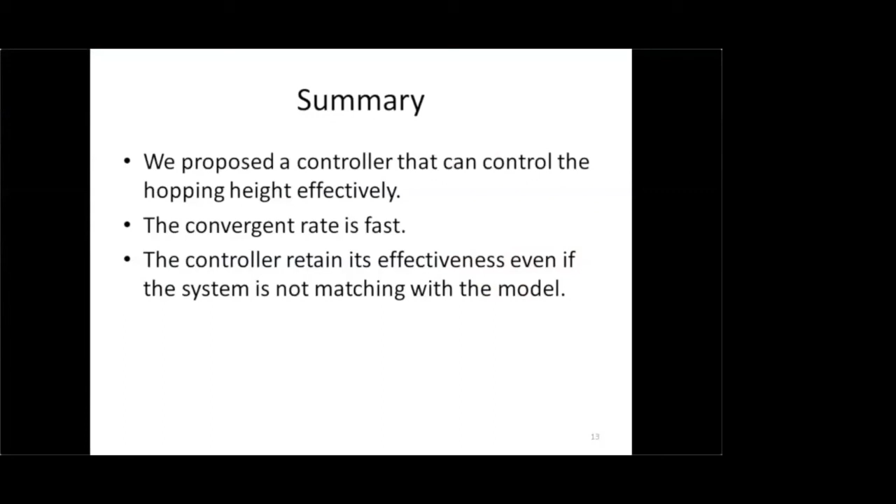In summary, the controller is effective in controlling the hopping height with a fast converging rate, and the controller is effective even if the system is not perfectly matching the model.

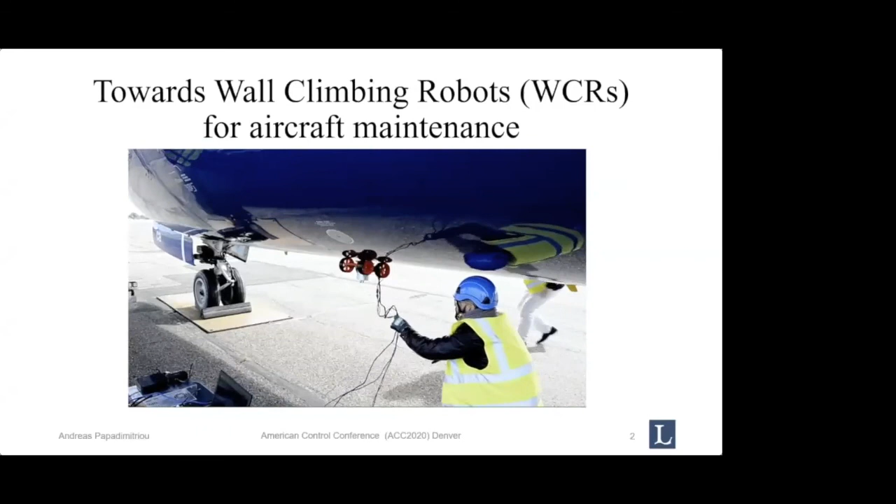The robot is differentially steered with the ability to remain attached on non-ferrous and ferrous surfaces under any orientation. The platform can generate up to 7 kg of force, enabling the ability of carrying multiple tools for inspection and repair purposes. The robot is able to translate to both curved and flat surfaces and weighs approximately 1.7 kilograms.

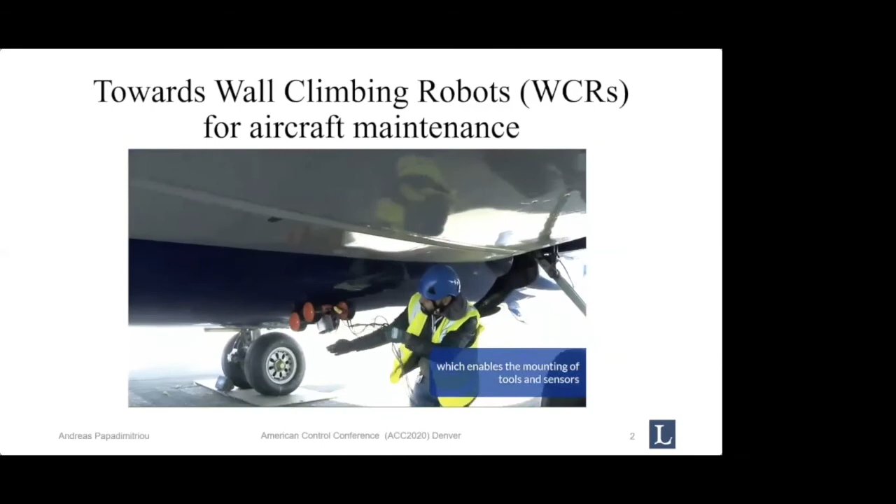In addition, it is able to provide smooth and accurate motion performance and has the ability to translate over the different curvatures of the aeroplane, while utilizing multiple sensors for the motion of the vehicle and sensing of the generated force. This opens new ways for autonomous aircraft inspection and repair.

Through the various ways to achieve adhesion, this project focuses on negative pressure vortex adhesion generation, utilizing an electric ducted fan known as EDF. The difference in pressure under the cavity of the EDF and its surroundings will induce an adhesion force onto the target surface.

There are many variables that affect the maximum generated force, such as the size of the shroud and its distance from the target surface. Noise and nonlinear characteristics such as hysteresis make the adhesion control a challenging task.

To tackle the identification challenge due to the high complexity of the vortex aerodynamic effects, an ARMAX identification is selected for the modeling of the vortex actuation system.

To successfully control the adhesion performance of the robot, an explicit model predictive controller has been designed and depicted in the adhesion control scheme. The reference force is calculated from the multiplication of the gain k and the critical adhesion from the geometrical model based on the orientation of the robot in space.

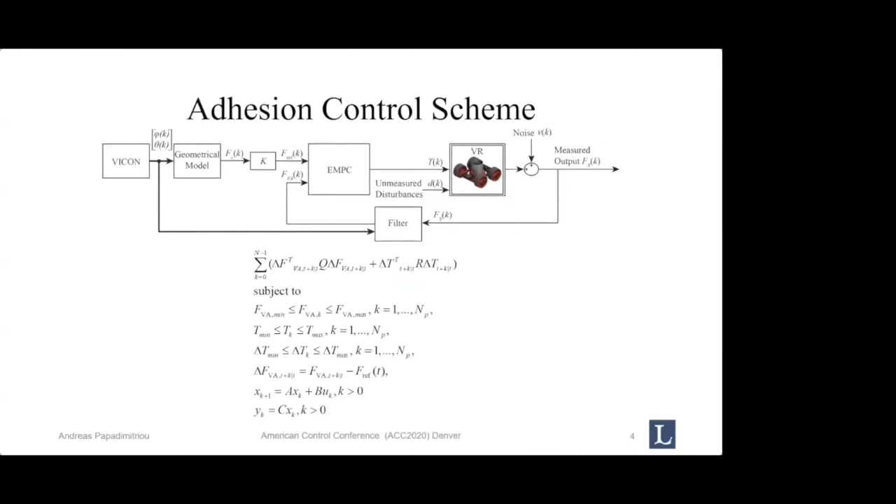The EMPC gives the optimal thrust input based on the current state of the system, while the measured force from the sensor is translated to the generated adhesion force with the use of the robot's orientation. The EMPC solves offline the following optimization problem subject to input, output, and rate constraints.

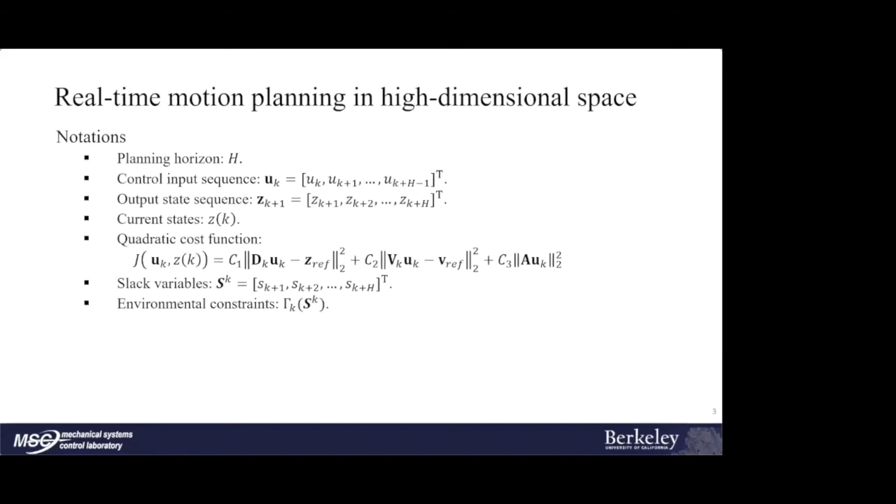We want to solve a control input sequence u k and result in output sequence zk plus 1. Given the current state zk, we construct the quadratic cost. We also introduce the slack variable sk to relax the environmental constraints. The overall optimization problem is as follows.

Let's take a closer look on the constraints. Given the obstacle's location, the function phi measures the distance between the robot link and the obstacle. By linearizing the function, we can construct the convex environmental constraint.

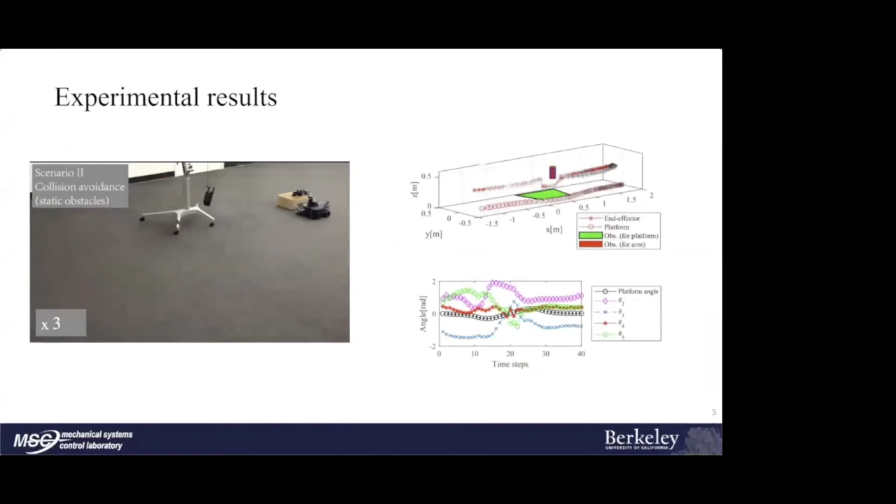To deal with dynamic obstacles, we introduce the hierarchical receding horizon control, HRHC, that combines the previous planning module with a safety controller that runs at a higher frequency. The safety controller reacts to rapid changes and projects the input from the motion planning module to a safe region.

In conclusion, HRHC enables the mobile manipulator to perform collision avoidance while completing its task successfully in both static and dynamic environments. Thank you for listening.

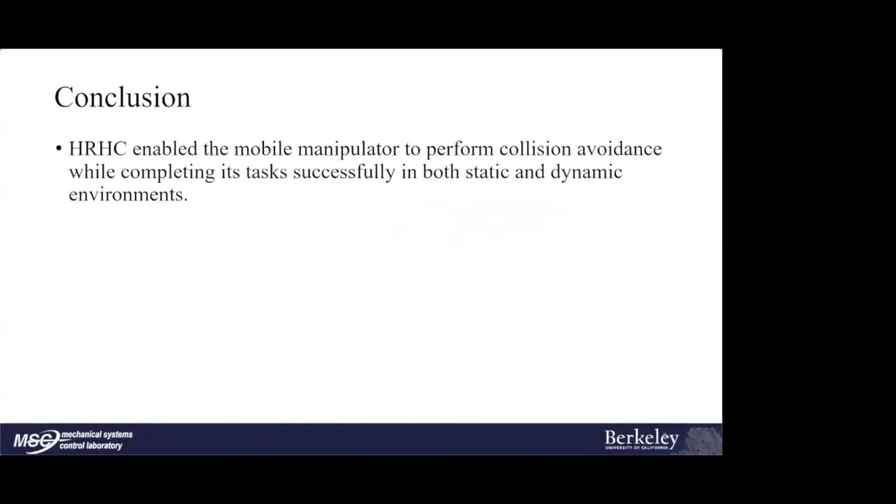My co-authors and I pursue our research in orbital robotics, and in this paper we propose a novel controller design for a fully actuated robotic capture of a tumbling target.

The scenario that we address consists of two agents. On the left-hand side is the target satellite, which is non-cooperative and has a multi-axial tumbling velocity. On the right-hand side is the servicer, which is a manipulator-equipped spacecraft, and we consider a fully actuated system here.

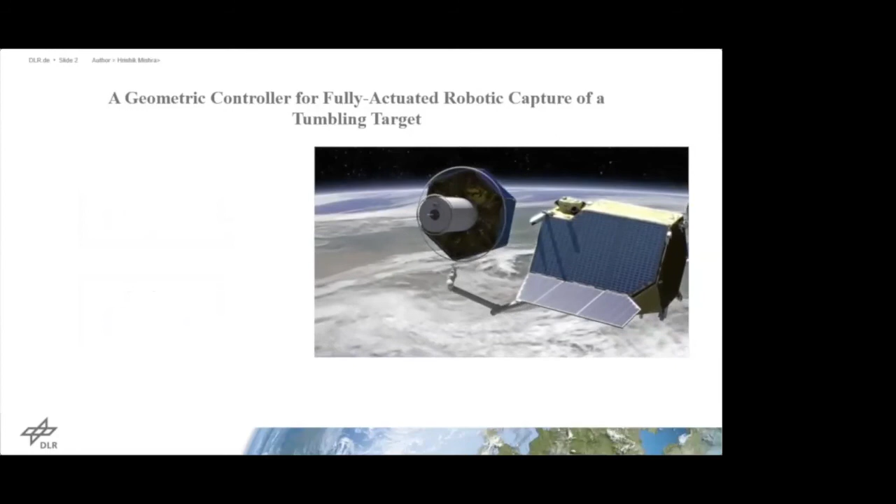The scope of this paper is the approach phase of missions concerning active debris removal and on-orbit servicing. In this phase, the servicer spacecraft has to synchronize with the tumbling target while the manipulator approaches to grasp a point on the target satellite.

From a control design perspective, we see that the reference frames on the target satellite are time varying, and yet the target state feedback on the servicer is limited to only a pose feedback sensor, for example a camera and its image processing. To address the issue of lack of velocity feedback, we propose the following architecture.

Firstly, note that the camera measurements capture the relative dynamics between the target and the servicer. In the paper, we propose a novel extended Kalman filter which uses the target model to estimate its motion states, specifically velocity and acceleration. The filter states include the SE3 pose for the target configuration and its velocity twist.

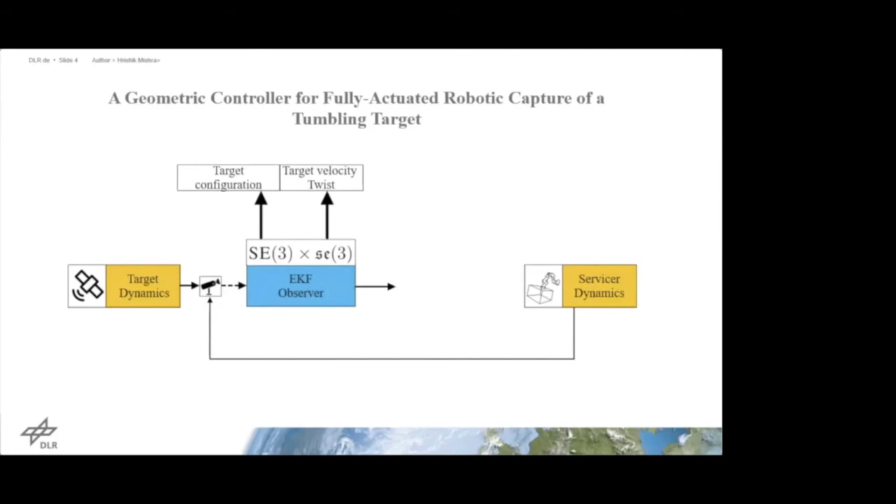The estimated quantities are fed as both feedback and feed-forward terms to a nonlinear tracking PD plus controller.

Both the observer and the controller describe the corresponding configurations as SE3 group entities in contrast to Euclidean coordinates. In the paper, we show the limitations of a conventional controller, like noise sensitivity and steady-state errors of both spacecraft and end effector of the servicer.

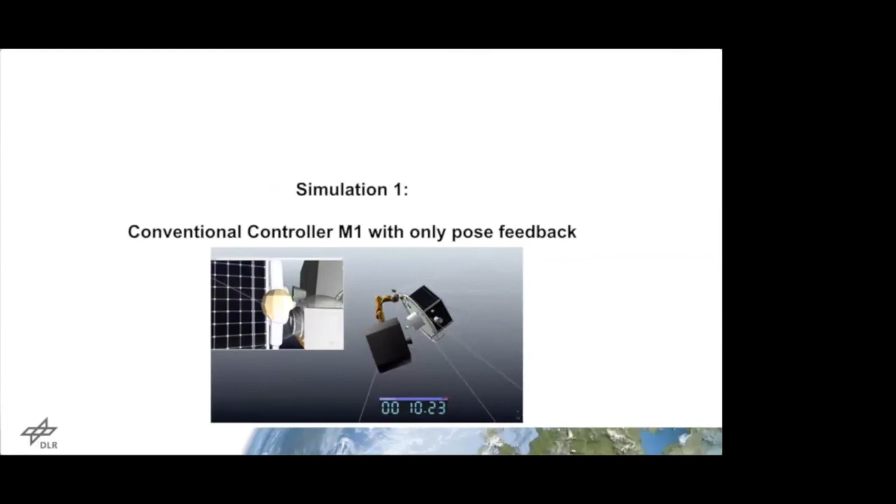At 5 seconds, the controller was engaged and the approach phase commenced. Note on the left of the video, the end effector has very low steady-state errors. This is achieved due to the velocity feedback in the control loop. In particular, the errors are also shown in form of position errors on the top right, which is less than 1 centimeter in all components.

The lack of velocity feedback may be compensated with high control gains, however this will increase noise sensitivity. Due to the feed-forward terms, the servicer spacecraft performs synchronous flight relative to the target. By doing this, the manipulator remains closer to the preferred configuration than if it were to compensate for the spacecraft errors. Therefore, we validated the effectiveness of the proposed method through simulation results.

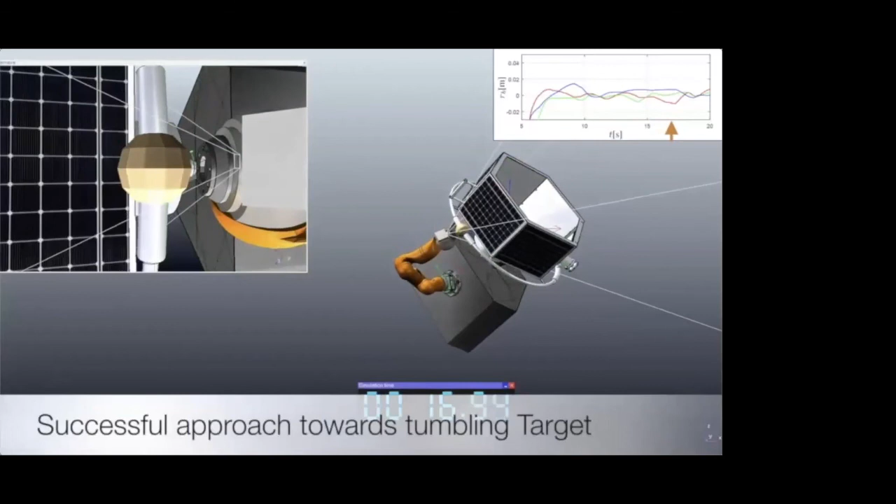Hello everyone, my name is Jamie from UT Austin. My presentation today will be on reachability-based trajectory optimization for robotic systems, especially given contact sequences.

When we control complex robotic systems like a humanoid robot, we have to consider multiple issues. First, full body dynamics is nonlinear; sometimes we use a linear inverted pendulum model for the planning. Second, most robots have physical joint position, velocity, and torque constraints. Third, we consider kinematic constraints for contact and friction cone constraints.

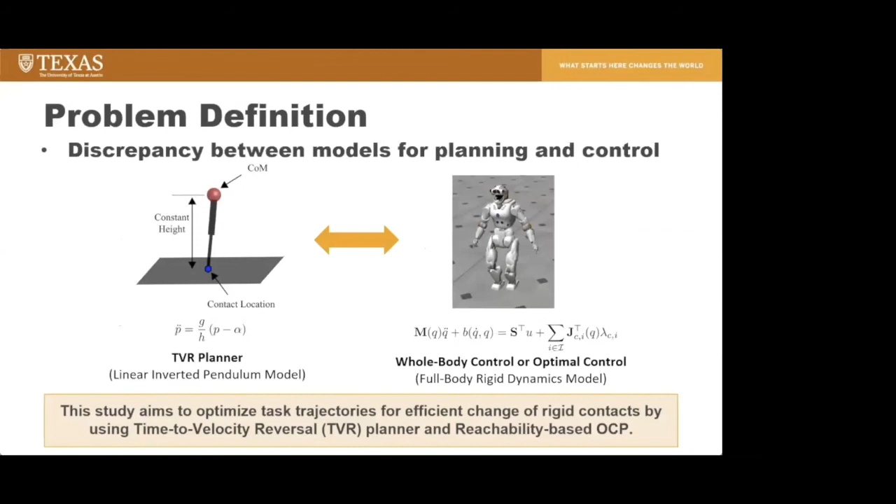We focus on the discrepancy between the planning and control models. For locomotion, we plan the center of mass trajectory and foot location with the TVR planner. However, we don't know if the planned result can be reproduced by the full-body robot due to the constraints. So we proposed a method to check if the planned foot location is reachable or not, and to optimize the trajectory for the whole body controller.

In our previous work, we just planned the center of mass trajectory and foot location using the TVR planner and generated swing foot trajectory using smooth interpolation like B-spline or cubic spline. Trajectories of center of mass and foot are controlled by the whole body controller. However, this paper proposes an additional part consisting of kinematic feasibility test, reachability analysis, and optimal control for modifying the trajectory.

Also, we propose a method for obtaining forward and backward reachable sets in terms of the given contact mode. These methods are based on sample-wise optimization. For computing the forward reachable set, we draw random input samples satisfying the input constraint and solve the QP to obtain the joint acceleration. The initial state is propagated forward using this solution. Also, we can obtain the backward reachable set by drawing joint velocity samples satisfying the constraint.

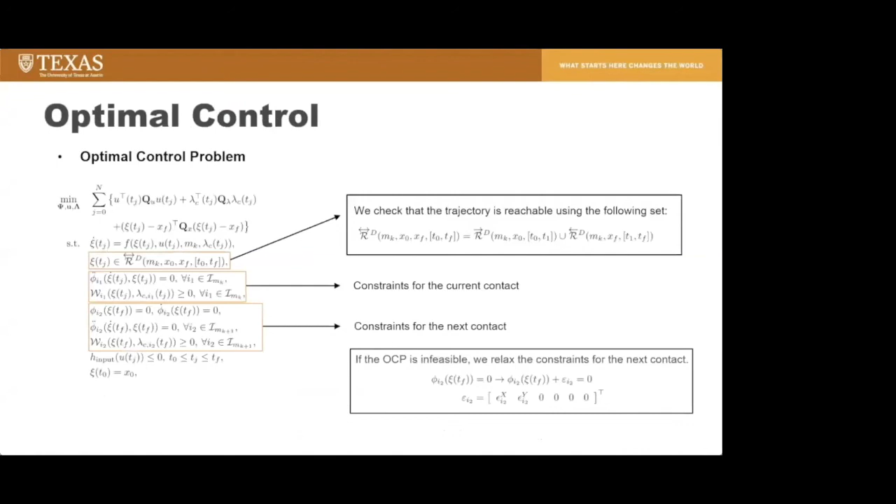Then, we check if there is a pair of input and contact force in the optimization problem. If yes, we can propagate the state backward; otherwise, we discard this sample. Based on the computed reachable set, we can test whether our states are reachable or not over a finite time horizon. Then we solve the formulated optimal control problem to generate a trajectory to change the contact mode. As a result, we can modify our foot trajectories for the whole body controller.

These are numerical simulation results. We employ the same TVR planner and the same whole body controller. Without the proposed method, the TVR planner produces diverging foot location. However, the proposed method can make more stable walking due to the optimized trajectory.

Let me briefly sum up the main contributions here. Thank you.